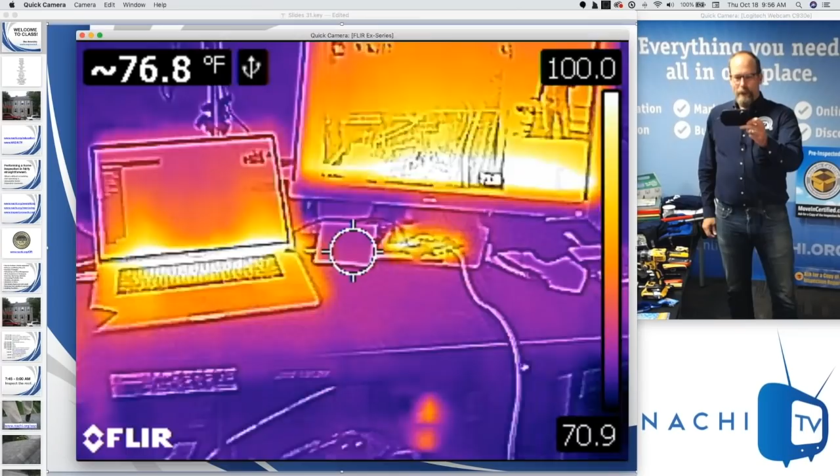This helps a home inspector perform a better inspection because it allows me to see things that I wouldn't normally be able to see without it. That's what an infrared camera is. It's essentially that.

It's very similar to my table of tools here. This guy, right? This is a high lumens flashlight. And this allows me to see things that I wouldn't normally be able to see without it.

The standards of practice for a home inspection doesn't use the word flashlight, doesn't use the word infrared camera, or moisture meter, or screwdriver. But we all use one, right? It would be kind of odd to do a home inspection without a flashlight. Why? Because a flashlight allows me to see things that I wouldn't normally be able to see without it.

So if there's something hidden in the dark corner, right, I'm doing a visual inspection according to the standards of practice, and I can kind of look at it. But the home inspector who carries a flashlight will actually do a better job because she will be able to see things that she normally wouldn't be able to see if she didn't have a flashlight.

Same thing with infrared. Don't freak out about infrared. Now you're trained on what to see when a flashlight is turned on. You know, because you've been living as a human being, what you're looking at, right? But when you use an infrared camera, it's really different, it's quite different, right? So you have to be trained on interpreting what you are seeing with the infrared. There's my camera, there's my flashlight that I just used, and it's hot.

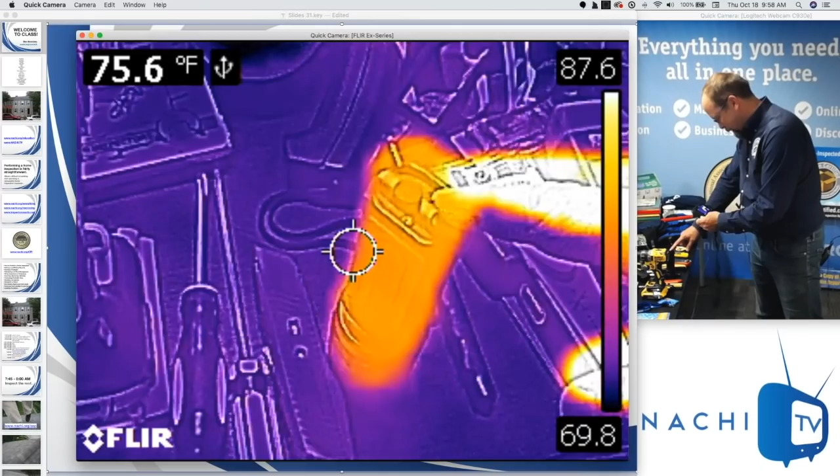So infrared is a really great way to provide value to your home inspection service and differentiate yourself from others. And the third benefit, and most important benefit, it allows a home inspector to perform a better inspection, right?

Let's see, let's start. It's just about time. What's the name of that camera? It's a FLIR, F-L-I-R C2. FLIR C2, it's my favorite. I have a FLIR C2, I have a couple actually, FLIR C2s. I have a FLIR C3. I have this camera, I have a FLIR, an old one, E40BX. I had a FLIR BCAM SD. That was an old one. So I like infrared cameras.

I still use them. Just yesterday I was in my driveway, driving home, pulling up, and my neighbor is standing in my driveway waiting for me. Why? Because she knows that I'm the local neighborhood home inspector who has an infrared camera and a moisture meter, and she has a water problem. Her roof is leaking, she wants me to come over today. And I didn't have my infrared or moisture meter at home yesterday. I said, will tomorrow be great?

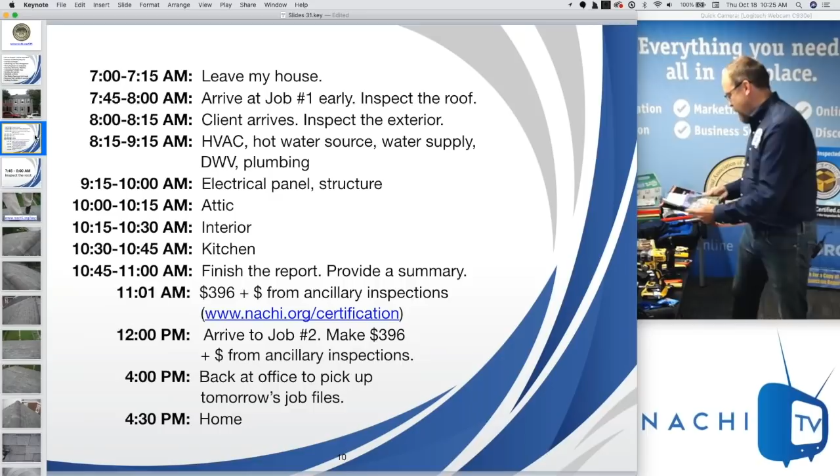You can get the regular cover or a customized cover, same cost. If the perceived value from my client is greater than the cost - I think the perceived value is like $19.95. You can probably get this on Amazon, something similar, full color inside. It provides information I don't need to give during the inspection and waste everyone's time about home maintenance.

That's valuable information, it has weight to it. It's valuable, it's a heck of a lot of value, and it's only $2.70 - costs me nothing. If I actually raise my inspection fee $5 and provide a $2.70 product or service, I just raise my inspection fee and my clients pay for their own home maintenance book and a cup of coffee for me every day.

I don't buy anything, not even my infrared camera - my FLIR C2 for $500. Go to Inspector Outlet - members get discounts or special pricing consideration. I would just raise my inspection fee a few dollars, and over the year this would be purchased.

By who? Not by me, I don't want that overhead. My clients - my clients buy the tools that I use, that in return provide great value. Does that make sense? I'm not going to think 'oh, $600' or 'oh, $2.70 for a customized home inspection book.' Nope, this is just an opportunity to provide value, and that overhead is going to be paid for by my client.

Oh, we're like three slides in and we haven't even gotten anywhere.

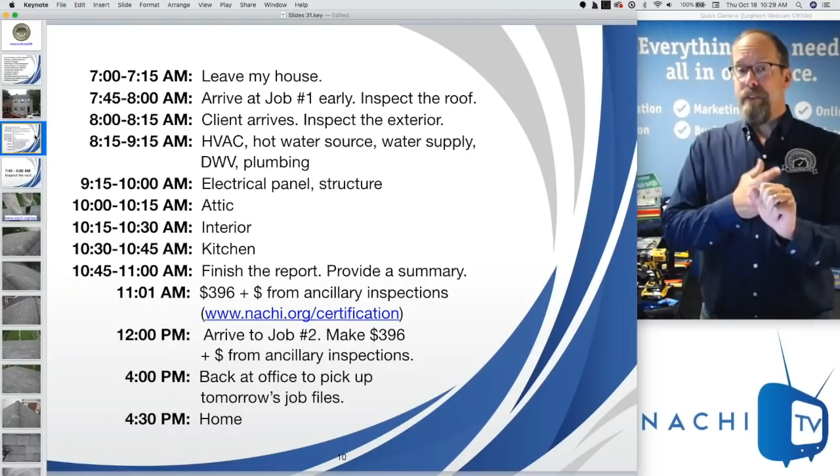I'll do that. In my business, when we did a home inspection, 75% of all home inspections were bundled with a radon test, 50% were bundled with a wood destroying organism inspection, and 10% were bundled with a water quality test, and then it went down from there. So there's potentially profit in that. There's another rule of thumb: if it doesn't add a significant amount of time, you can do that ancillary service and it will be literally just profit.

So here is where you go to get ancillary inspection certification: nachi.org/certification. InterNACHI provides more than 45 additional inspector certifications, not just home inspection, not just the CPI. Remember we talked about the CPI logo, but we have all these others - there's a drone certification, a commercial inspector certification, a deck inspector, a garage inspector certification, an indoor air quality inspector certification, a meth house hazard inspector certificate, and a lot of other additional certifications.

You put this, it's almost like a copy paste. You can try to copy it, paste it on one of your web pages that says something like 'my qualifications' or 'why hire me?' Because the inspector with the most badges wins in that kind of value area. The value of you being certified in everything is incredible. I'd pay for that. The more value you bring to your business, the higher fees you can demand.

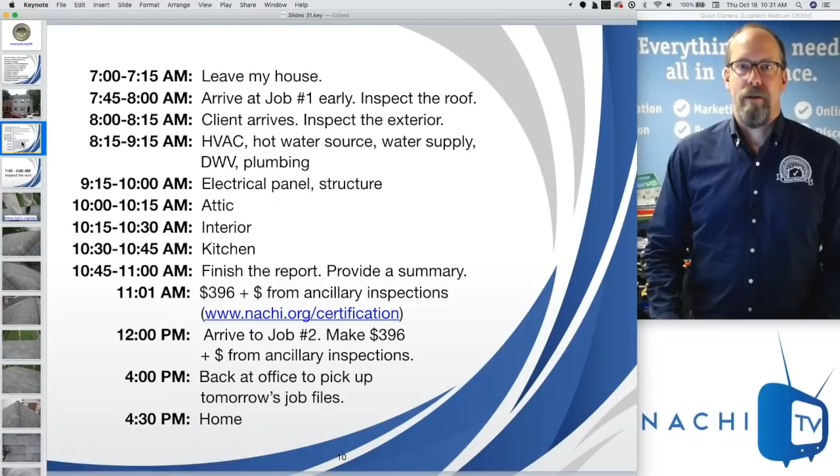7:45 to 8 o'clock, I'm inspecting the roof. And bam, that picture is in my inspection report. Why? Well, I walk on the roof. I'm telling you, don't - it's fatal if you fall. It's not required. According to the standards of practice, you're not required to walk upon any roof surface.

The standards of practice link is right there, you can click it, NACHI.org SOP. It says not required to walk upon any roof surface, not even a one-story flat roof. Not required to walk upon it, but I do. Why? Well, I felt that it was better for me to do it as an inspector. I got to see more. I got to see defects that I wouldn't normally be able to see if I was inspecting from the ground. So there's an advantage there.

I found I did a better inspection than my competition. And the other reason was this amazing photo was on my website, in my marketing, and in my best marketing piece that I could create, which is my inspection report. You can put that also on social media and blast this out. That says a lot - you actually walk upon roofs, and it looks really tall, and it was.

That's okay. I wanted to - if I'm going to do something in my normal routine process of performing an inspection, and it's better than my competition, I have a duty to tell everybody about it. The result is I'm going to beat my competition because I am communicating value. It's on my social network, my channels, my neighbors know it.

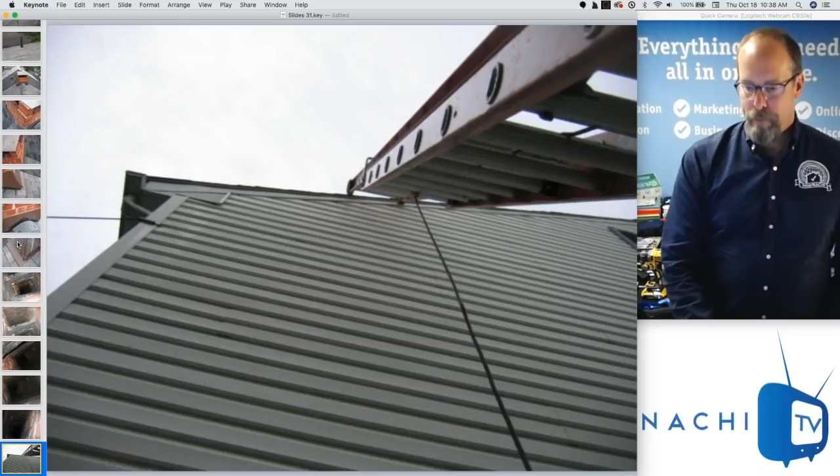Really cool shots, that's just my camera with a zoom. And that's me getting up on the roof. And as I come down, I look at the gutters, see if there's any venting, ventilation, any fascia, eaves issues.

And I'm down on this, I believe it's the back side of the roof. Yeah, and there's a secondary roof. So I'm on this porch roof on the back - well, it used to be a porch, and then he enclosed it. Some debris in the gutters. Wherever there's two different materials touching each other, intersecting each other, I want to see flashing. If there's an open gap, I want to see that open gap flashed or sealed. So there's flashing there, that's good.

Flashing and sealant around the windows. They've been capped, old windows. The vinyl siding is probably installed on top of brick or something. There's a shot of the backyard, and not required to, but I'll take a look at the driveway in the back there and the parking area for sure, but that little ancillary shed, I'll take a look at that too.

And I'm thinking also of how water is collected by the roof, controlled, captured by the gutters, controlled by the downspouts, and discharged away. You are not required to inspect or be responsible for anything that goes underground. So I don't know exactly what happens when it's raining. It's not raining today - it could just overflow. It's a hard surface, doesn't look like dirt is eroding. There's no indications that there are any problems with the underground drainage pipe, but there might be. I'm not responsible for it.

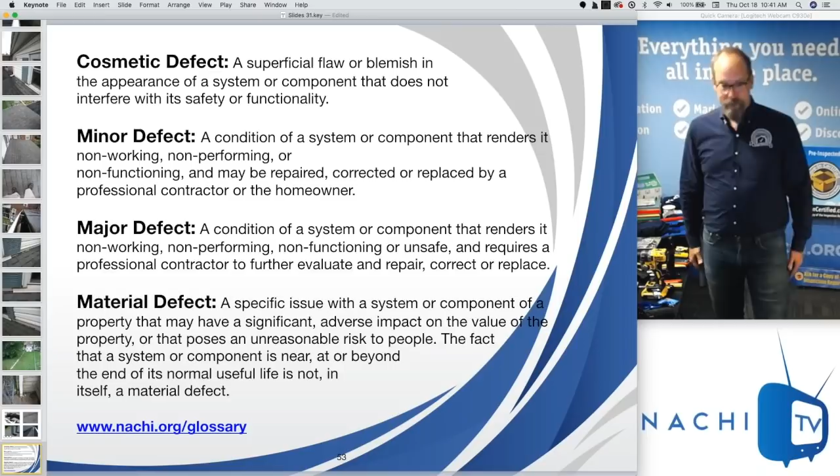How do you inspect roofs in bad weather? I don't. I mean, I try to be safe. I've got a family, right? So I want to come home. That's the most important thing—always being safe.

If it's slightly wet, for some reason, asphalt shingles to me were just a little bit stickier, I don't know why. If it was snow and icy, and it was low to the ground and safe, I sometimes went up there with a broom. All I wanted to do was get some kind of eyes on some part of the roof. So I hardly ever excluded a roof from my inspection. I was always able to get out there somehow.

Nowadays, like two years ago, I wasn't all that crazy about drones, but now I've got a drone myself, and we fly drones. We have a drone course. It's fairly available for a home inspector to be a drone pilot through the FAA—you've got to take the pilot exam. We have a course that helps you take that exam, and you can do drone video or drone imagery with 4K resolution, so you can blow it up.

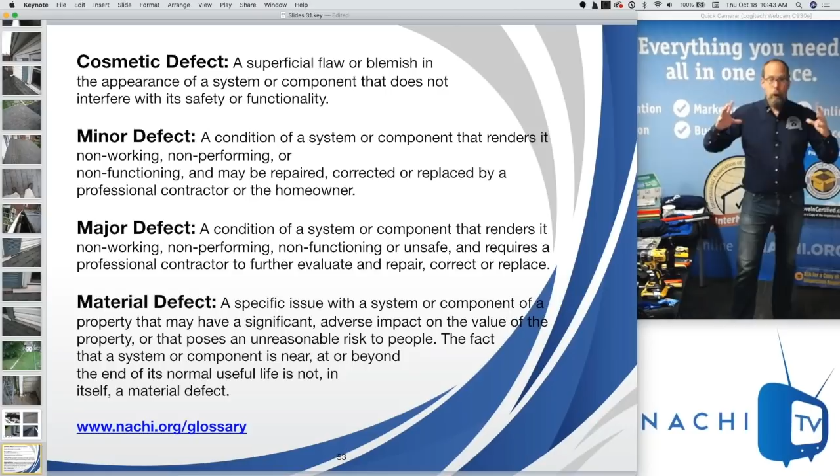So if you have a drone and I don't, but I have ladders, that would be a really cool way to compete with each other. How am I going to compete with Bob, who has a drone, while I use ladders? Bob's website probably has a home page, a hero image with some kind of aerial view, and he's standing there with his controller, waving. That'd be an awesome shot. I'm probably going to put myself on a ladder, getting up on the roof, something like that. We'll compete, and it'll depend upon what people value, right? So you have to think about that kind of stuff too.

You don't have to get up on every roof, especially in bad weather.

What are the most important tools, meters, and software a new inspector should get? That's easy. You need a flashlight, a high lumens flashlight, right? You need these things.

Flathead and a Phillips. I like, and I don't have it with me, I don't know where, it's a combination, it's like a 6-in-1. So you hold one, pull out the flathead and spin it, and it becomes a Phillips. Or you pull it out like this and take out a screw, a hex screw or something. There's like 6-in-1 sets in it.

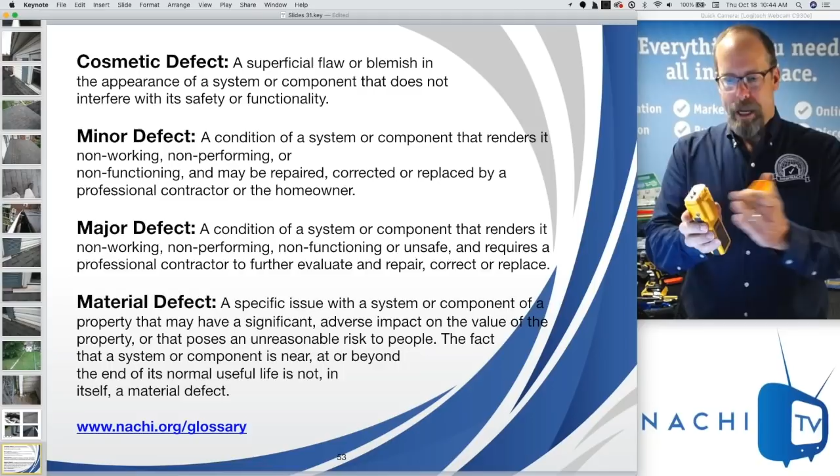I would get a moisture meter, even if you don't have an infrared, but that's next—a moisture meter with pins and a non-invasive surface. This is a Protimeter, this is an Extech, kind of like that. The microwave detector is kind of like the shock and awe—you stick that in the microwave with a cup of water, and it turns red if there are microwaves.

I use this when I want to—it's a laser thermometer, so I ping the registers, electric baseboards, boiler baseboards, water baseboards, radiators. And then these are my favorite too—this is an extendable hoe.

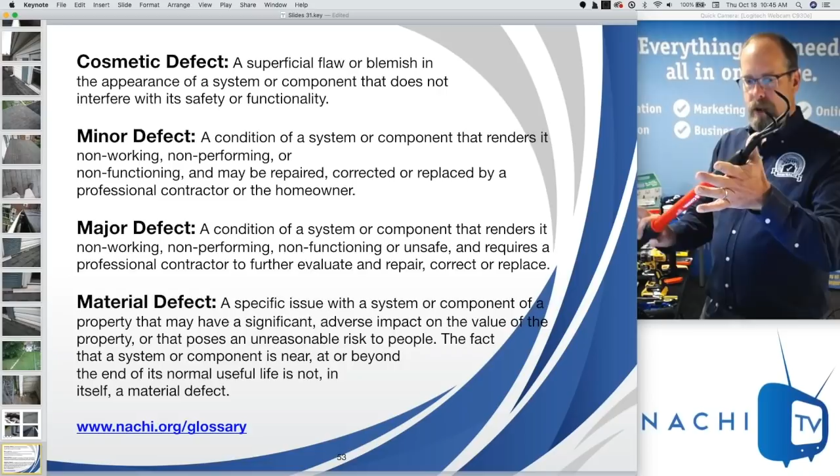So the whole total price is just a few hundred dollars. Your flashlight, a good one, is $200, but it's LED lumens. Then the other tools—well, you need a razor, that's nothing, a mirror. Infrared is probably the most expensive so far, $450 to $500. This extendable hoe is probably $50, and it extends.

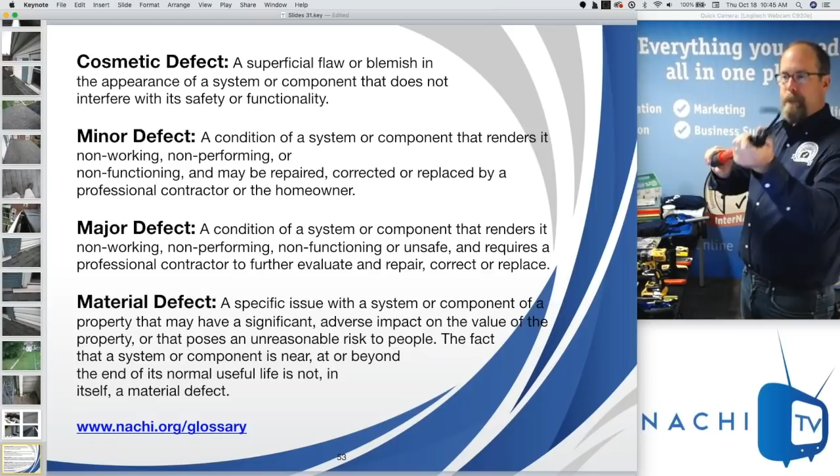It has 3 tines on it, like fingers. I heat one up and straighten it so I can poke, and the others are for hooking and grabbing insulation and putting it back, and no one knows. This is a hydro shark, very difficult to find, but they're still around, so you got to Google it.

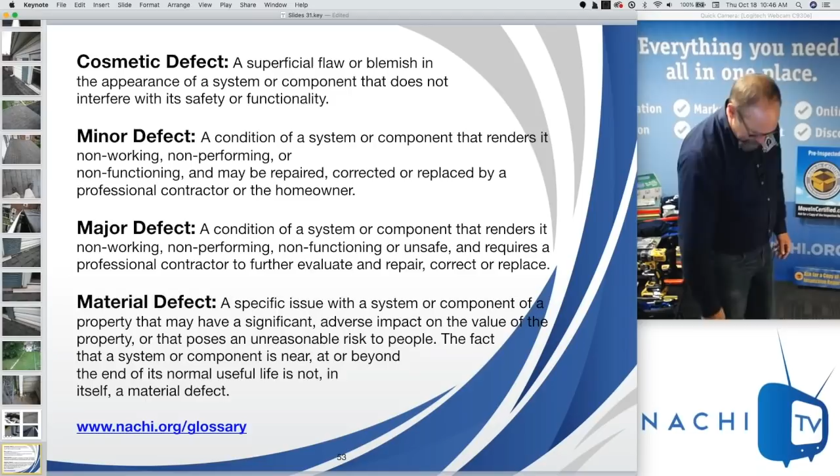But it's a moisture meter. There's pins here, and it gives me a symbol and an audio signal. What I do is reach a ceiling, and I can also go around a basement and go through the carpeting and padding, right? So that's an easy thing. If you're doing well flows or water flows, you need a water meter.

Those are the tools. One of the most important tools, if you do a lot of vacant homes in the morning, you need one of these. I wore this instead of putting Peach Inspections, that was my company name, Peach Inspections, on the back. I wore this so everybody knew I'm not trying to rob the place or break in. I'm the inspector.

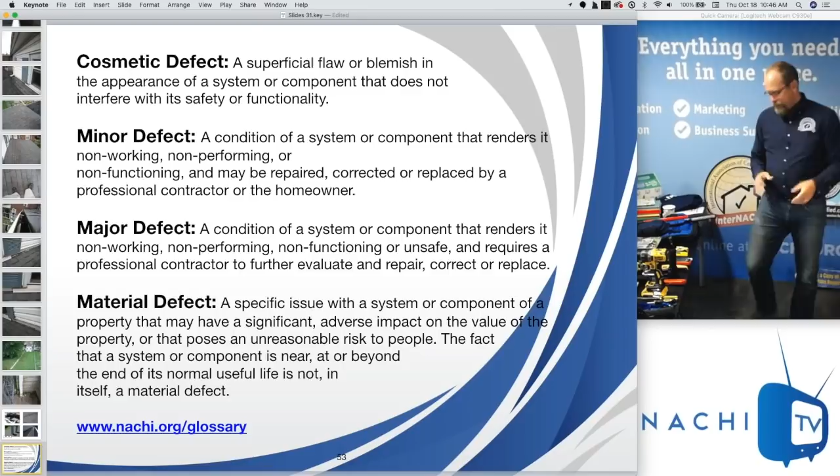Yeah, so those are the tools. It's a very low entry point, you don't need to invest a lot of money to get in. One of the other expensive things would be software. It's essential, you need software. I have software on my phone.

Let's see. Come on, there it is. Oop, oh hold on, where? So software... sorry, that's my wife.

That's Inspector Coach, I have Home Inspector Pro. Home Gauge works on PCs, I believe. And I have Spectora on my phone. I also have Pitch Factor, which is an app.

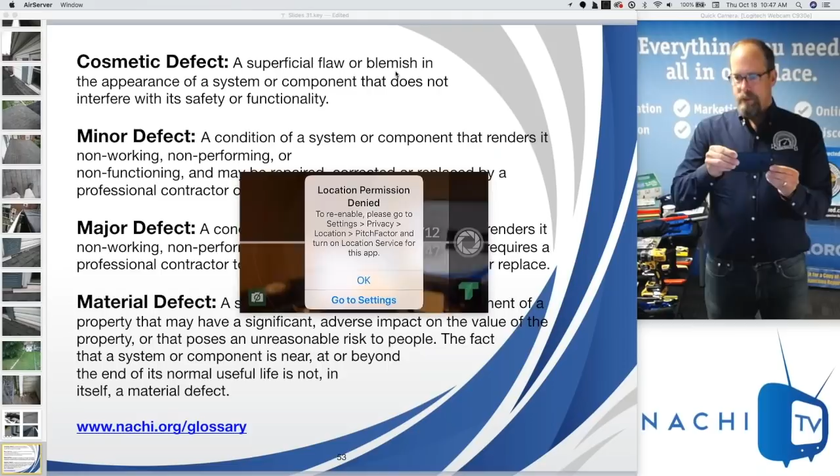PitchFactor lets me measure the slope of the roof. I don't know why they say pitch, home inspectors use slope, not pitch. Pitch is that black stuff, tar. This is a cool app for measuring things.

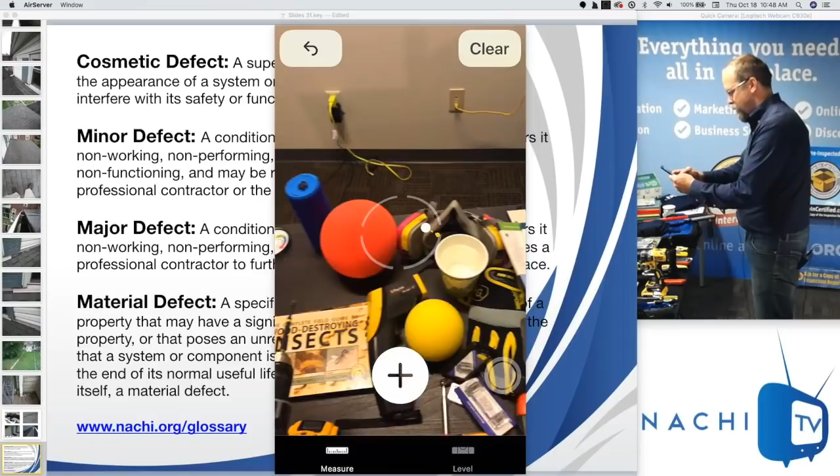Let's see if I can actually get it to work. If I want to measure something, I'll drag it and measure over here, and over here, this way, measure this way, so that, right? And then I measure like that. You see this? Hope you can.

Oh, oops, I'm shaking too much. Well, anyways, it can measure for you. If you want to measure that, so that's 15 inches. Oh shoot, let's try it again. There, it's there, so I'm going to measure this. Measuring this distance, there. Maybe I'm not doing it quite right, sorry about that.

It's a new app that I'm learning. It actually takes measurements in 3D space, and then you can snap a picture of it, if it was working. Don't know, it was working for me just a little while ago.

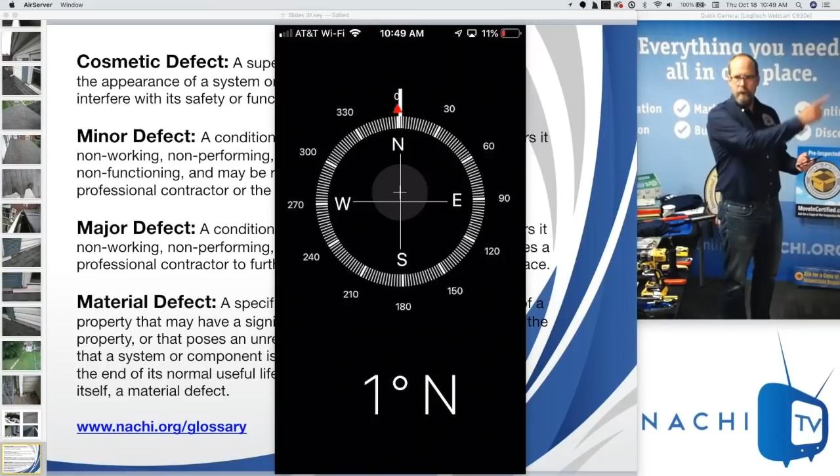Technology again, right? How about the compass? Obviously, so where's north? North is that way. East is towards you. And then there's software.

I'm learning Spectora, it has good software. In the residential report, here's the roof covering materials. I inspected it from the ladder, let's take a picture of the roof. Let's say this is a picture of the roof, very nice, use that photo. And then it's asphalt shingles, it's 5 to 10 years old.

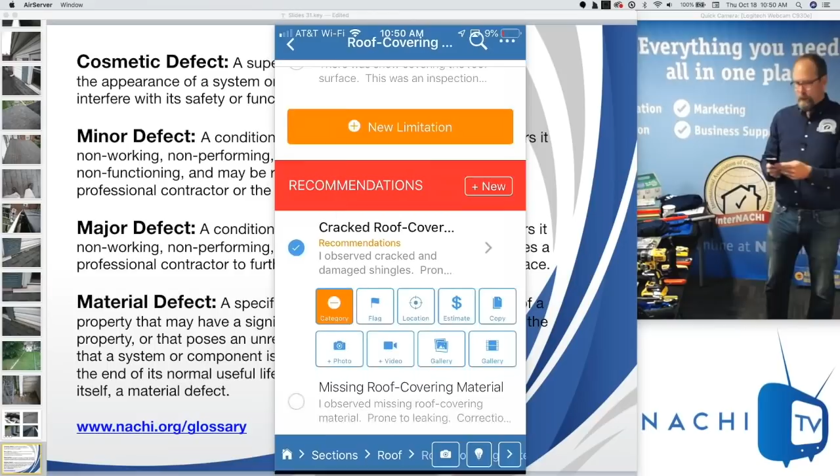There's cracked roof covering material. Oh no, there's cracked, that's a cracked roof covering material. I take a picture of that, and that goes in the report, right? And I can add arrows and stuff if I wanted to. It's fun, and that goes in the report.

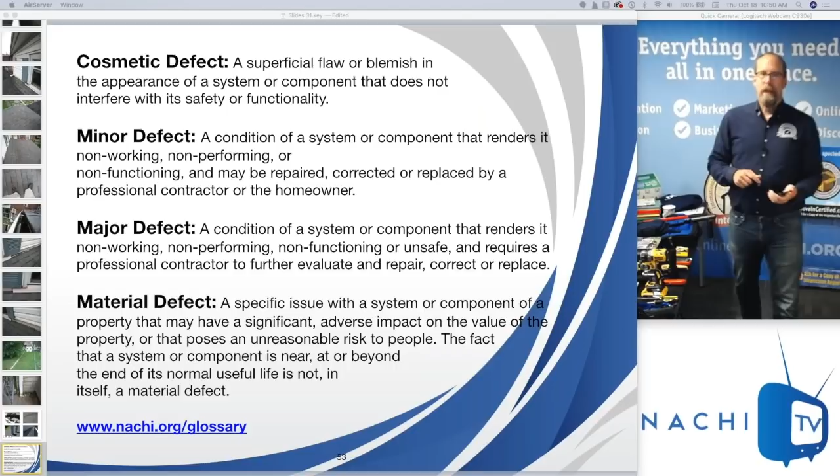So while I'm inspecting, I'm taking pictures. You can also do video. Hey everybody, there's my webinar room, tabletop. You can put that video in the report and throw it to the cloud. Now your inspection reports are immediately available with 100 photos and video, and you're inspecting and writing at the same time. That's really efficient with your time.

In your report, I would identify defects. I recommend using some type of definition standard that identifies the degree of the issue. If it's a minor problem, say minor. If it's a major problem, say major. Or if it's a material defect, defined as a defect that you saw and deemed material, something posing an unreasonable risk to someone's life, that's a material defect. These definitions of different types of defects are in our glossary at nachi.org/glossary.

A cosmetic defect is like a superficial flaw, it's a stain on the carpet.

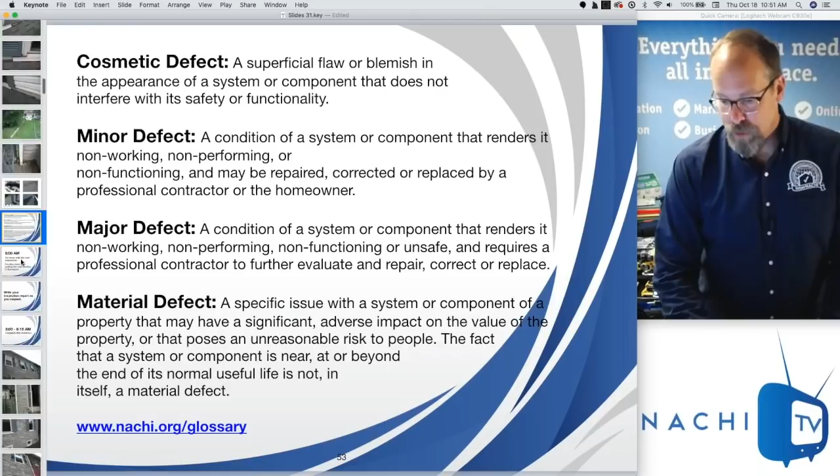A minor defect can be repaired by the homeowner. A major defect needs a contractor. And a material defect, it's going to hurt someone. I use those definitions in my report, so when I take a picture of a defect, I tag it as cosmetic, minor, major, or material.

And it's already defined. 8 o'clock, I'm done with the roof inspection and I'm walking down, looking at how rainwater is collected and controlled and diverted away from the house. I'm also done writing up the roof system, so the inspection report is partially, completely done. I'm done inspecting it, I'm done writing it.

You should write your report as you inspect. Why? Because to make money you have to think about math. The top part is the numerator of the fraction, right? Two numbers divided by. Top number is numerator, that's the amount of money you're charging. Divided by what? Your time. If your time is taking all day to make money, you're going to go out of business. You need to reduce that time, reduce that denominator.

And you only can make money that way, like $500 in 5 hours is $100 an hour, right? But if you only spend 3 hours, then you're going to make more money per hour. And that's where you want to be. You want to be efficient with your time.

One great way of being efficient with your time in your home inspection business is to write your report as you inspect, so you're not spending time at night after dinner writing your reports, which is open to error because you can't remember what you saw 8 hours ago.

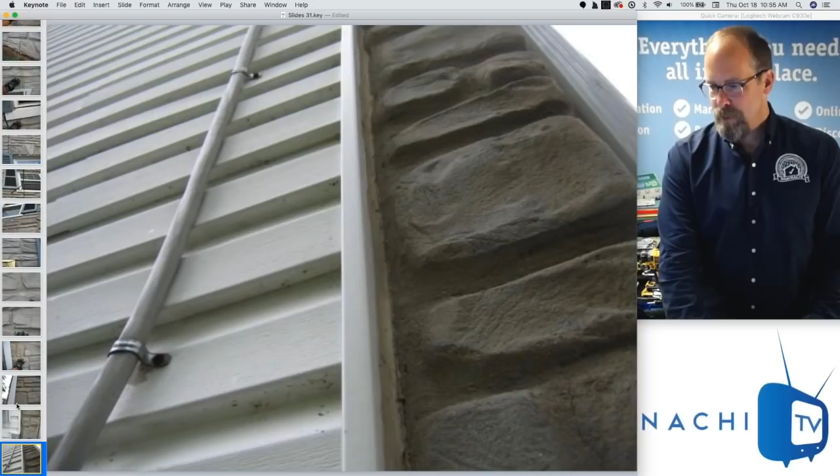Cracks here and there, not bad, nothing's loose. Two different materials coming in contact with each other. There's the electrical line coming down to the meter on the side of the house. The downspout, I want it diverting water away from the house, not at the corner of the house, which I think used to be a porch in the back that they enclosed. So we'll take a look at that corner, see if there's carpenter ants or wood rot or moisture problems, especially when I see algae growing on the siding.

So I think about water as I'm inspecting the exterior - how water hits the roof, is controlled, collected, and diverted away from the foundation. It should slope. The first 10 feet around the foundation should slope about 6 inches down.

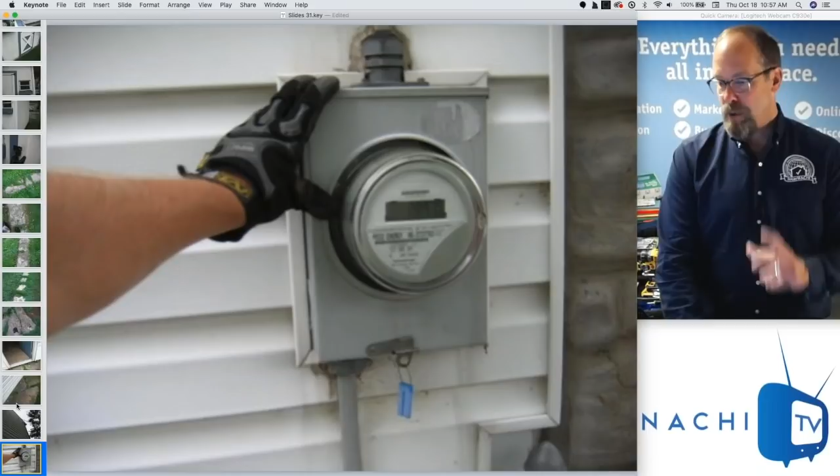Electrical line, overhead electrical line, drip loops securely attached to the house. Electric meters securely attached to the house. The line going into the house, the service conductors going into the electrical panel - I'm going to inspect that and follow that in.

And here's where we talk about code. So before we get to code, stairs, and handrails, let's see - oh, there's a ton of questions. I don't know if I can get to them.

I would like advice on advertising because I'm not getting any calls.

So Angela, I get that question a lot. There's a few things you need to focus on. I would go to inspectorcoach.com and download the 8 steps - that'll help you. Make sure you have a web presence.

Because why? I don't even go to a restaurant unless I visit the website and look at the food. I'd assume people don't go to a movie and buy a $15 ticket before they watch the previews. If they like the previews, they go to the movie. Same kind of mentality - we like to test drive before we purchase, test drive a car before you buy it. Same thing with a home inspection company.

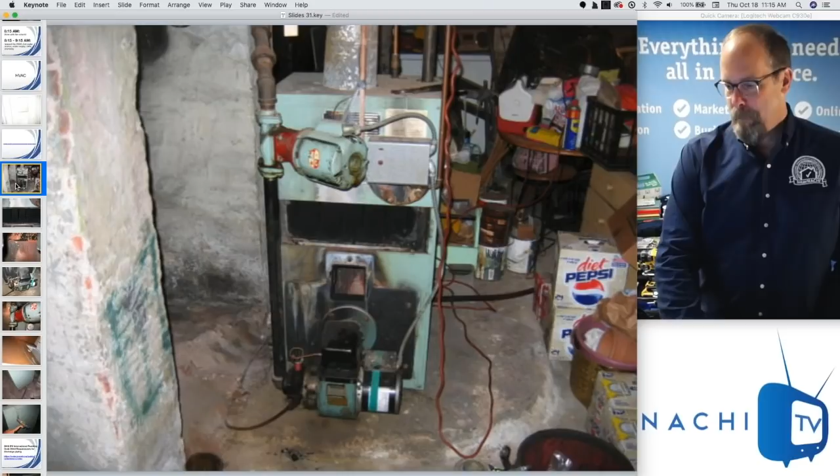Here's a heating system. If you're unfamiliar with this, if you're in Florida, you have no idea what crazy stuff we do in cold climates. This is Northeast, and what we do is we suck this black stuff called oil out of the ground and we burn it so that we can heat our home, right? Crazy. So this is a boiler, it's filled with water. There's a burner that's sucking oil, turning it into a mist and igniting it. Flames shoot into a chamber, heats up the water in the boiler, and then we turn on a pump and circulate that hot water throughout the house. Crazy. That's why it looks like a mess.

So much fun to inspect. In the front, there's this little thing you can pull off. You can kind of see that chamber of water, and I did that, and it is filled with soot. Like, what is this? Why is there so much soot on the outside? I have no idea. Am I supposed to? Am I supposed to know what is going on here? Why is there soot all over this thing? Oh my gosh, no, I'm a home inspector.

This is like walking along a path and tripping over a stone, a trip hazard. This is unusual because I've taken all the courses that I need to be knowledgeable about how to perform a home inspection. And when I come across something like this, soot, it's almost like tripping over something, it's so obvious and conspicuous. So I just put it in the report as a major problem. We need somebody in here to look at that further, right, and to fix it if it's necessary to fix it. That's it, I'm done. Click.

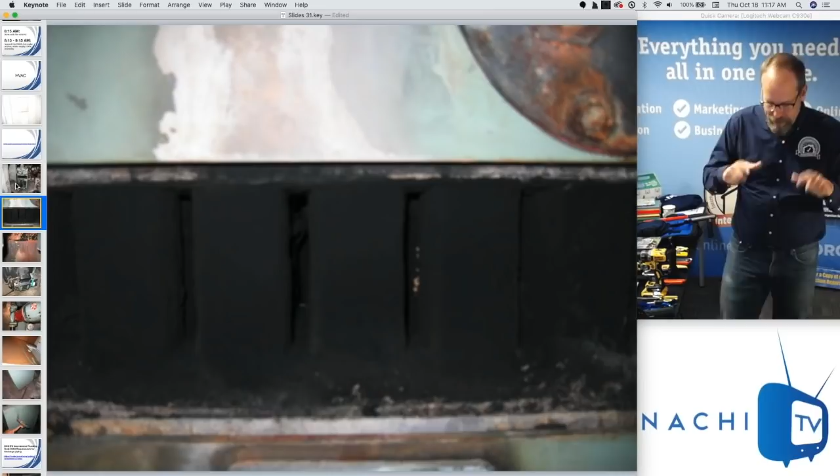This whole inspection of the boiler system takes maybe 5 minutes, tops. Click, I'm done. Whoa, there's the chamber, there's the burner. Half of the job of a home inspector is just identifying the components of a system: circulating pump, emergency shut-off switch, drain for the boiler system, rust on the jacket, discharge for the TPR, temperature pressure relief valve. When you heat up water, it needs to expand. There's a lot of pressure and temperature things going on. If there's a problem and it exceeds a certain kind of limit, we have to release it, release all that pressure and temperature and discharge that hot water, which could be scalding.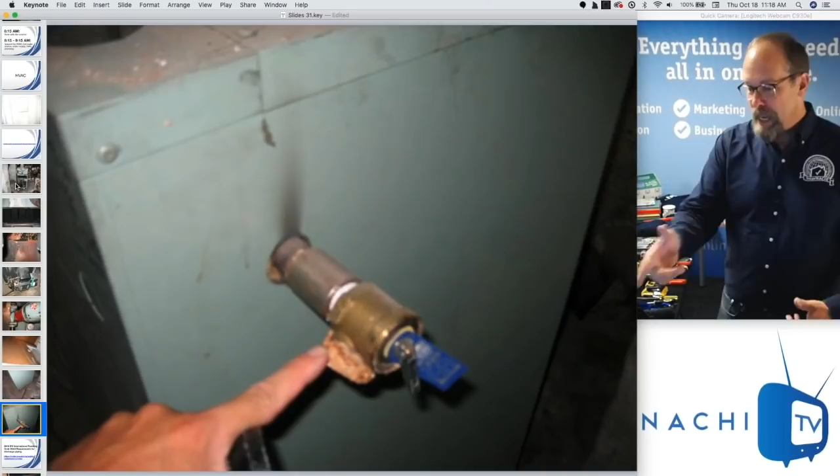There's 14 things that code says about how to properly install, or what a properly installed TPR valve discharge pipe should look like. And this is violating several. That code is in the 2018 International Plumbing Code, section 504.6, requirements for discharge piping. That information is actually in an InterNACHI course about relief valves, and you can take a look.

There's a few things every home inspector should know. One is the TPR valve should discharge with an approved material pipe down to the floor so that no one gets scalded with hot water if there's a temperature pressure relief discharge.

The flames inside the chamber have exhaust gases that are hot, and they need to enter a chimney stack and take that upstairs, out into the atmosphere through a chimney. Remember, the chimney is unlined.

Damper control, oil line, other components. The hot water actually comes from the boiler itself. Cold water comes in through a coil submerged into the container of boiling hot water. So it coils in, and as it coils out, it's hot, scalding hot. So it has to have a temperature control valve on it, because the hot water to all the fixtures is going to be 180 degrees, 200 degrees.

That's burning. That could burn a little kid. It can burn anybody within a couple seconds. So we need to temper that hot water coming from the boiler. It's missing on this old boiler.

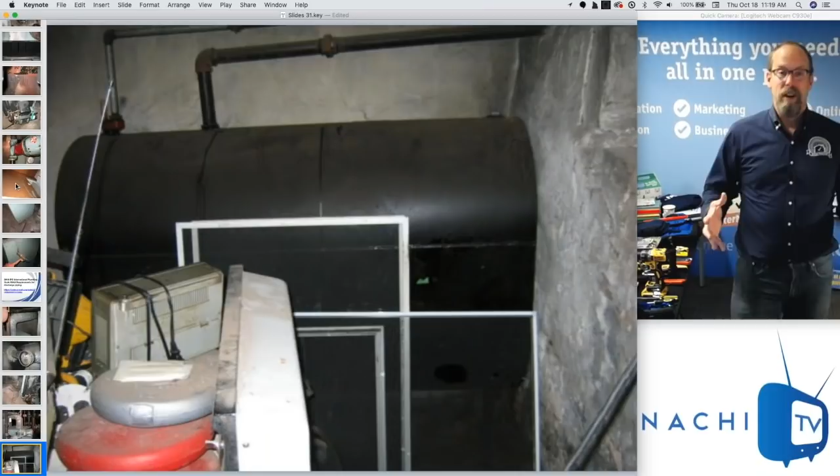Oil storage tank. They store oil in tanks inside basements in cold climates. Crazy. There's the oil fill pipe, oil vent pipe, the gauge, oil filter. This pipe goes to the boiler, to the burner of the boiler.

I take a look at the underside belly of the tank and the legs to make sure there isn't any major rust. I get my screwdriver, or you can grab a hammer. I bring a hammer, but I don't actually show it, because nobody wants a home inspector swinging a hammer. I try to tap things, but you can also tap and probe.

Sometimes, when you're probing a load-bearing wooden component, your screwdriver goes through it, right? That's wood rot. I leave my screwdriver in and take a picture. Remember, if you do damage within the scope of a home inspection, there shouldn't be any damage that you find. So you should have nice pick tests.

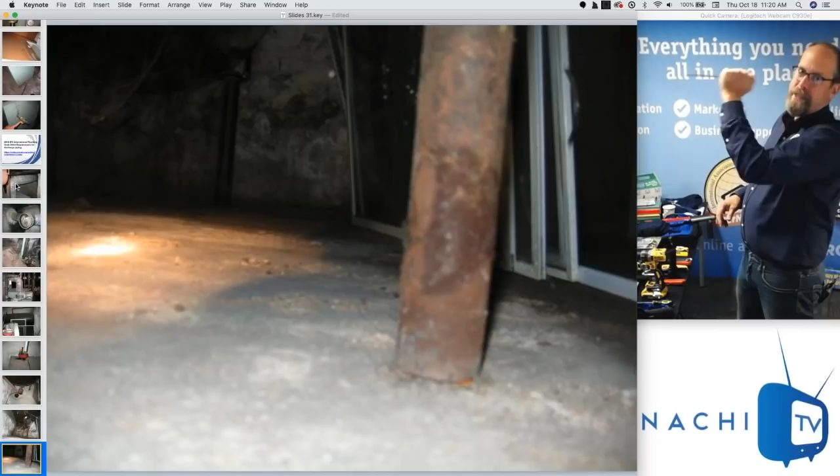They're called pick tests, sound tests. But if it goes through, I crank it open and take a picture of the wood rot, and I put it back. So if my screwdriver goes through this pipe here, I'm taking a picture of it. It shouldn't go through, it's a steel pipe. And if it does go through, that's 500 gallons, 750 gallons, that could dump in someone's basement. We don't want that.

Expansion tank, hot water source comes from the boiler. And there's... let's see if I can grab it. Can I grab that? Yeah. So there's the control valve for the hot water, and that round circular thing is the domestic coil.

Water supply. Water comes in from the street. There's a main shutoff valve, a ball valve, a water meter, jumper cable, another ball valve, turn off, check valve, done.

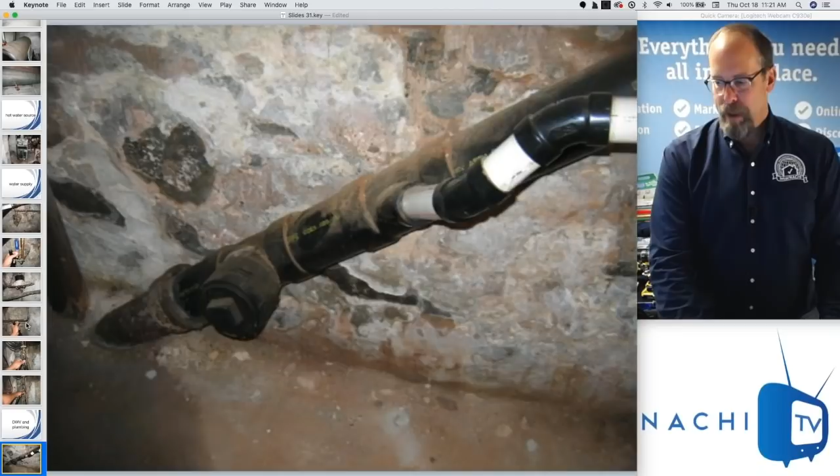Drain waste vent plumbing, some PVC, ABS. Don't like the combination very much. And then there's a sewer pipe here, cast iron sewer pipe, and it has a hole on top of it. I lift my camera up and take a shot, take a picture. There's a hole in the sewer pipe. That's a major problem. It's in the report.

Some other fittings here and there and some cleanouts. I'm just looking for a nice slope on the drain pipes, any active plumbing leaks that I can see, proper support of the pipes. It's very difficult, these are crawl spaces.

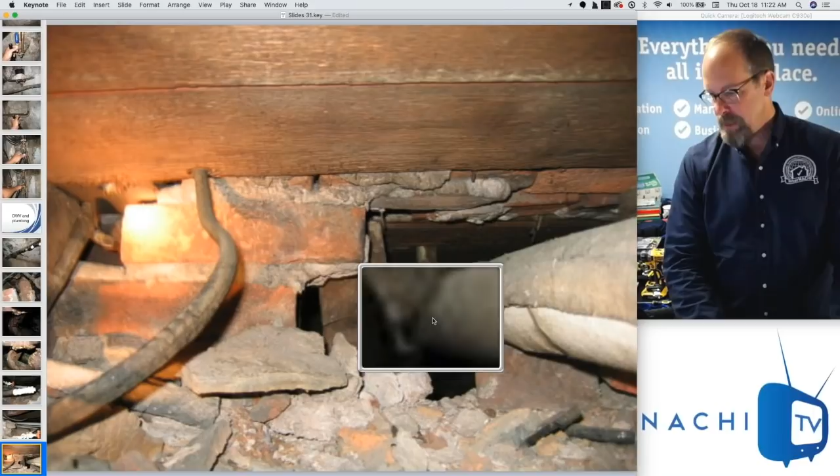We've got asbestos material. I will comment on any indications of apparent asbestos material for my clients. I'm an EPA certified lead hazard risk assessor. I didn't do the asbestos assessment, I don't need to. But that is asbestos, and so is that. I want my clients to know that.

Asbestos wrapped around the heating pipe there, going through the crawl space. I can't access it. Down in the basement there was a laundry tub. They removed it, but the fixture is still there.

Electrical only takes fifteen, twenty minutes for the panel. The structure takes a little bit longer because you're looking for structural problems and water. Water brings life, but it can destroy a home.

So for the electrical panel, take a picture of the outside. All the breakers should be specifically labeled. There should be plenty of room, and there should be a main disconnect somewhere. There shouldn't be any openings where I can stick my finger and get fatally shocked. A hundred amps, one finger is one hundred, two is two hundred amps.

Structure is very difficult, can't get everywhere, but where I can get, it's old original masonry, stone, beautiful. The stone structure looks great, but when you have stones like this, you have water. Stones are like sponges, they absorb water through wicking and absorption. And the dirt on the crawl space floor isn't a very good idea either, it's allowing moisture to come into the basement and the crawl space.

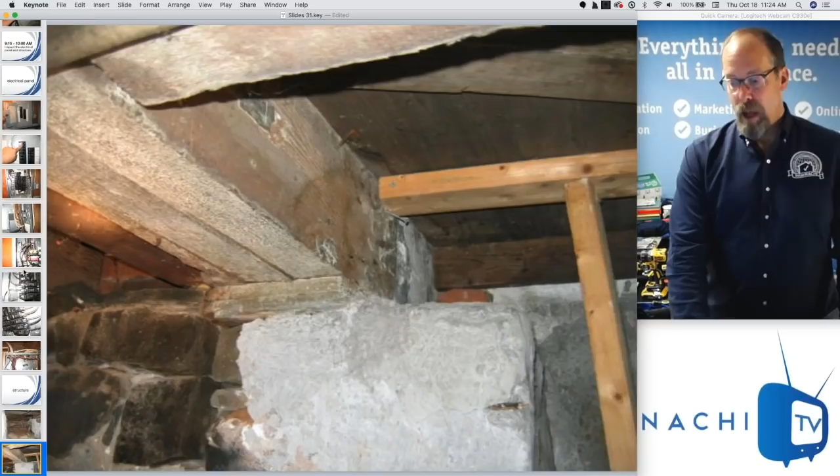There's a lot of structural things, like extra support. Those 2x4s were kind of nailed up into the floor to support the floor in certain areas. This was in the back room area, maybe that enclosed porch area. There was a porch and now it's being used as a finished room.

It's a bit of a concern, I don't really like the way this was installed. It could be installed better. If you know how, in a pre-drywall inspection you get to see the studs, you know that the top plates, the studs, and the bottom plate kind of look different than what this looks like. Load-bearing components are installed a little bit better. There's not even anything plumb or fastened properly.

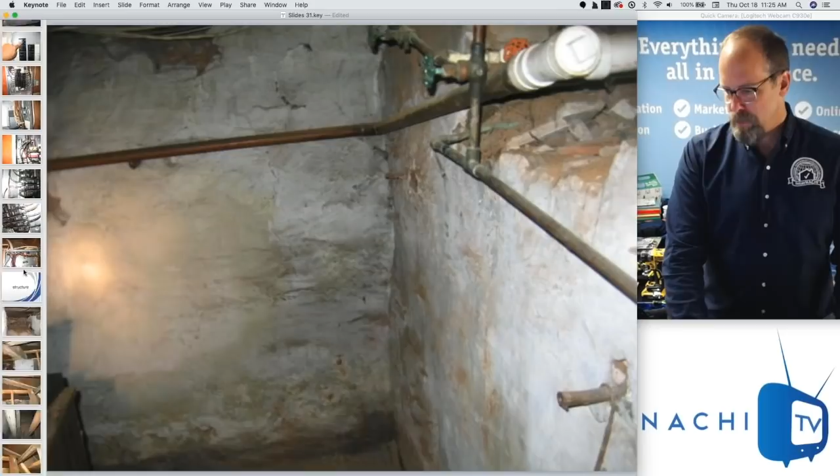So taking a look at stuff, there's a lot of pieces and a lot of nails, and it's not looking all that great.

Drain pipes, different materials. The basement is difficult to see everything, can't really look around. There's moisture on the floor.

But I want to make sure that if I'm ever sued in small claims -- have been a few times, no big deal -- there's pictures that you take just to show that there were inspection restrictions during your time there. It was limited and restricted. There's dirt and moisture in the corners, and it's okay. Now if my client wants me to do a lead test, I can do that.

Certified lead hazard risk assessor, it's a great service, five hundred to six hundred dollars per service. Basically I go around and do baby wipes on surfaces, floors, and things like that -- steps, landings, windowsills, stuff like that. Because we don't want small children to walk around, crawl around, and get lead paint content dust in their mouths. It kind of stays in a child that's young. Adults, we kind of excrete it out.

But the point is that no matter what home I'm in, I'm ready to offer the right service at the right time. So if I'm down in the basement...

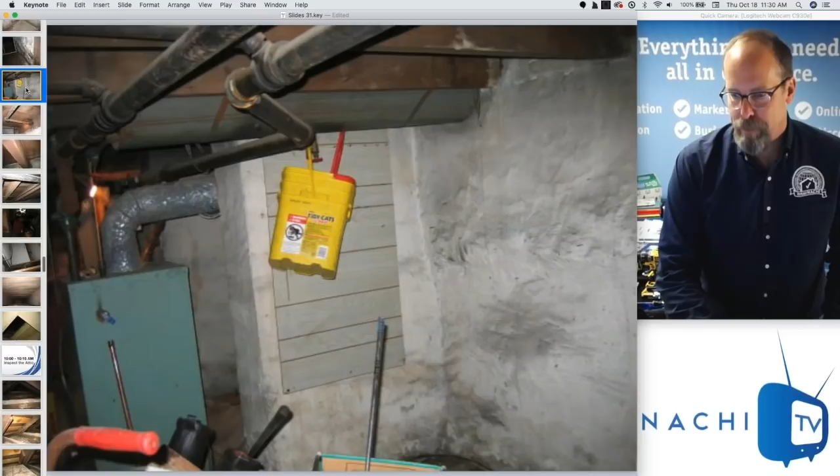Let's finish with the basement, and then I'll take a look at questions. Oh, measuring tape is one of those tools you asked about. So I take a measuring tape and I measure sometimes the depth or height of the floor joist, sometimes the length. If I'm doing a new home and I'm with the building supervisor, I'm going to inspect the length of the dryer exhaust - I always get them on that, it's way too long, too many bends. I'm also measuring things like access to the unfinished parts of the attic space.

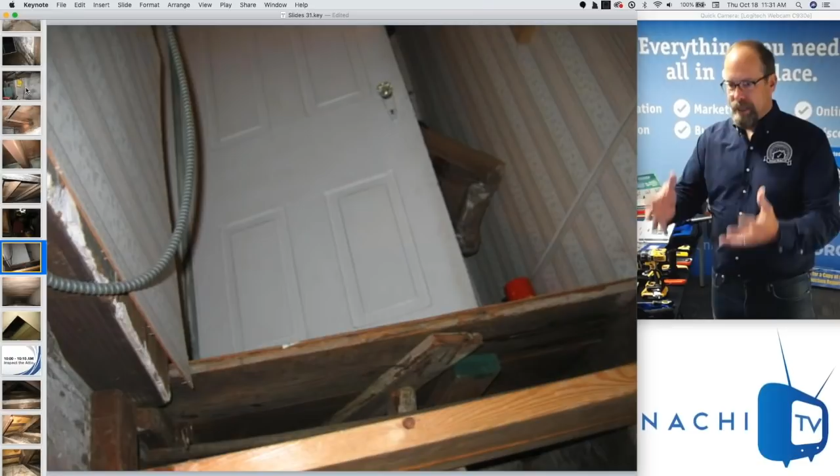There's the floor, and it's the landing at the top of the steps. So that's in a compromised kind of structural situation. We need somebody to come in here and fix that.

I'm going to inspect the attic now. And there's the unfinished attic.

But wait, let's see what kind of questions we have. Did you inspect the roofs in bad weather? Remember that? Okay, most important tools, advice on advertising, I'm not getting any calls - we answered that. What are your thoughts on drones for roof inspections? Good, we talked about that - drones provide value.

How can I assure potential clients and real estate agents that I'm worth the inspection fee? And is there a form or hotline I can contact if I run into something on my first few inspections that I don't understand how to inspect? Yes and yes. About your inspection fee, you have to be able to calculate a profitable inspection fee - that's chapter 11, I believe, in the home inspection business course. I showed you previously how to get to the home inspection business course. Just go to our education page, type in business in the search field.

There are other things you can do. There are tips on how to market to real estate agents, since you mentioned potential clients and real estate agents, and how to show them you're worth the inspection fee. So there's a general rule of thumb: overwhelm with value, value, value, value.

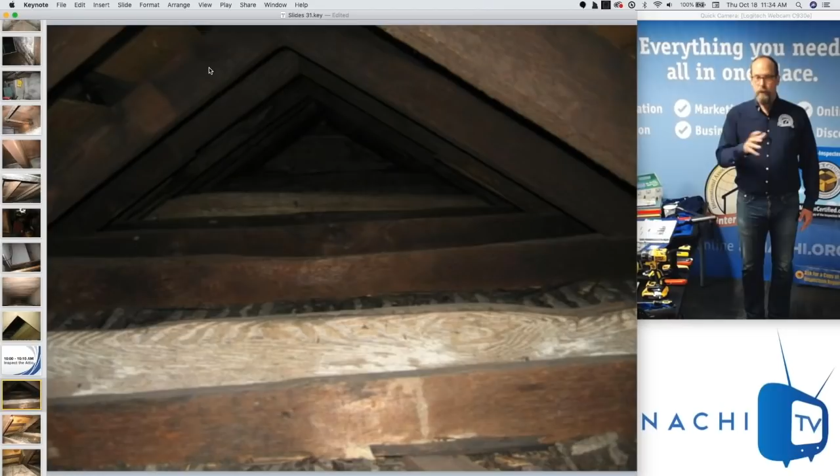How many immediately make the home inspection report and summary, with all the pictures and videos, immediately available after the inspection by downloading it from the cloud? Oh, that's software - high-tech software.

Now there's only like 4 of us - how many include a free infrared scan with every inspection? Now we're down to 3, right? And when I said free infrared scan, I actually meant free infrared scan - I didn't charge for using my infrared camera. It helped me do a better job. All I did was, because I was adding value, I increased my inspection fee to pay for the infrared camera at first, and then it's extra profit, right?

How many walk on the roof? Is that an unfair question? Oh, too bad, how many walk on the roof? Because that's my brand. Because the question could be, how many use a drone? Oh, I wouldn't walk forwards - darn it, all the drone people went up in front of me.

Now I'm behind. How many people offer a newsletter, the InterNACHI free newsletter, to keep in contact with your past clients? Oh, I forgot about that - I didn't do that, I was watching TV.

How many offer a home maintenance book bound in a beautiful 3-ring binder for every one of your home inspection clients? Oh, I was playing video games, it was fantasy football. So now I'm way behind, and my competition is way in front of me. If they keep going with all these value questions, they distinguish themselves from all the rest of us losers back here, and they're way out in the field all alone.

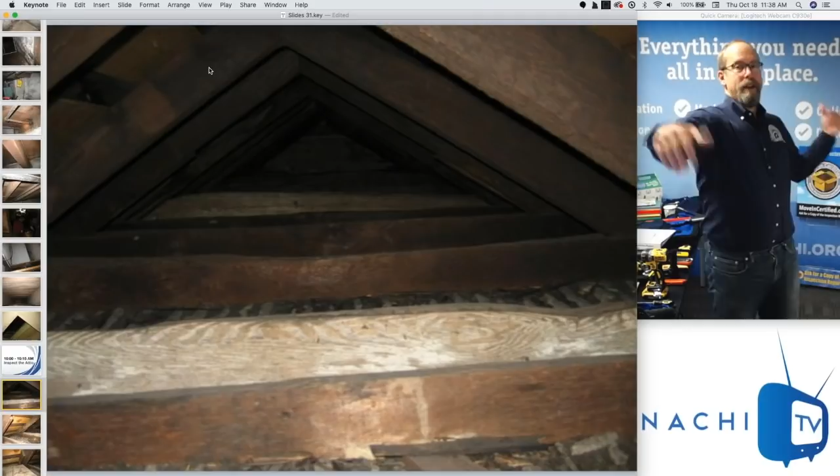And I don't even know what was the question? Oh, so how do you ensure - if you provide value, incredible value, that's all it is. So there's no secrets in this, right? So how do you get from here to where Sally is, way out in the field all alone, way ahead, charging $500 an inspection, making a lot of money, going on vacation, right?

You need mentoring or coaching or help from other inspectors. So we have an online forum, nachi.org/forum. You can go online and ask questions.

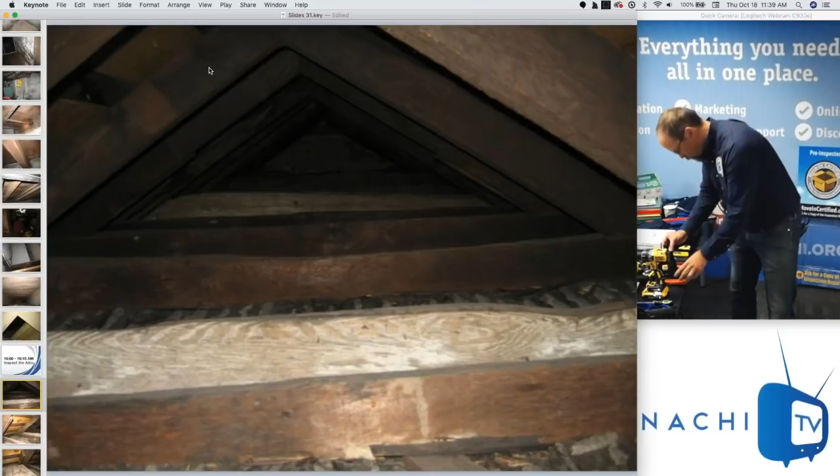I like inspectorcoach.com. On the online forum there's an emergency button, a big fat red button. You click it and you can get to speak to other inspectors while you're inspecting. So if you find something you don't know, what is this, you can excuse yourself, go online, hit the red button, and talk to other inspectors about what it is, and post it. Or Facebook is a good one too.

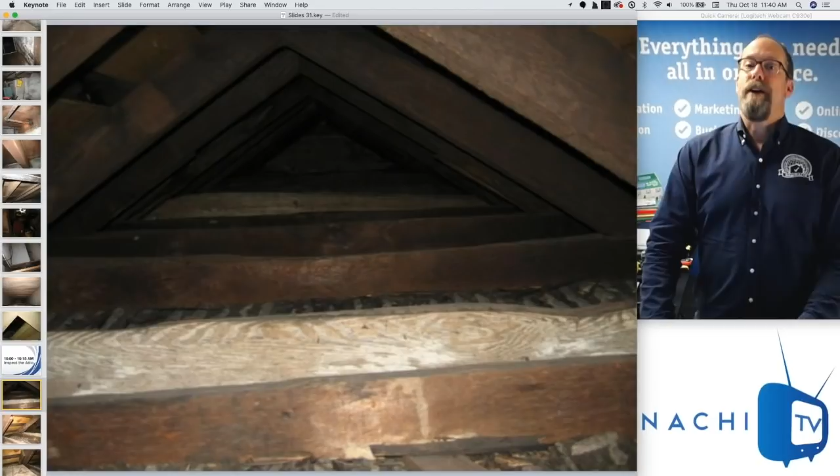How do I price a multi-unit, 12 lodgings? Well, that's way beyond the standard home inspection. Home inspection is 4 units or less in the same building, so you're into commercial now. InterNACHI has a commercial standards of practice. If you want to do a commercial inspection, you can get trained and certified as a commercial property inspector through InterNACHI. There's also another organization, ccpia.org, join that organization, there's a commercial standards of practice too. Follow the standards of practice. I was a home inspector, I did mom and pop pizza shops and dentist offices and things like that, no big deal. But the big buildings, yeah, you need additional help, you need to be more of a manager of experts. You're bringing an electrician, your HVAC guy, it's going to take multiple days.

What do you use for serial model number breakdown? These are good questions.

There's this company called Building-center.org. I don't know who it is, I think it's just a home inspector. I don't know anything about it really, but it tells you these ages: HVAC age, water heater age, and recalls. And it's a free service. You take a picture of the manufacturing label. Later on, you can look up the model number for HVAC, and it tells you the serial number and when it was made. Boom. You can look up recalls too. It's amazing, building-center.org. I don't know who this is, I've never reached out to them, but I would use it. Seems like a cool service and it looks pretty accurate to me. That's one of the things I'd do with serial numbers.

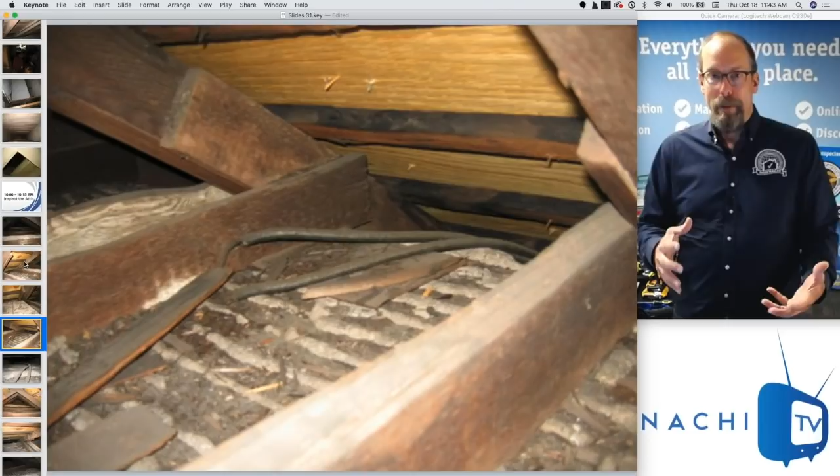Knob and tube wiring is really old, antiquated wiring, and I flag knob and tube wiring as a material defect. Then I need an electrician to come in and take a look at this and let them say hazardous or not hazardous, or potential, or whatever. For me, this is a hazardous wiring method, an ungrounded antiquated method of wiring that has inherent flaws and hazardous conditions. If you insulate around knob and tube wiring, guess what happens? It heats up and catches on fire. Structure looks okay, missing insulation. There's no insulation in the walls or ceiling of this house.

That is a lot of energy being lost. I'm glad I can tell my client what's going on. Coming out of the attic, now I'm doing the interior. Interior is maybe 10, 15 minutes, tops.

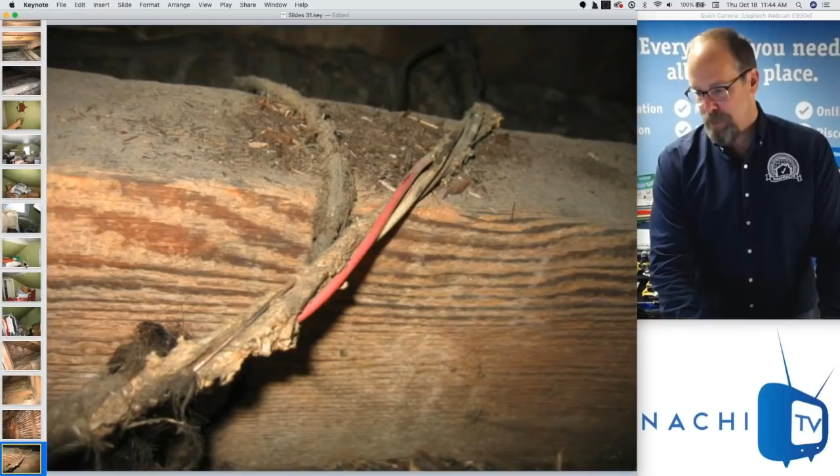Interesting. Knob and tube wiring, wood lath. Ooh, someone was chewing on this. This is old NMB cloth sheath, but it's been chewed up. So that's an electrical hazard. Someone needs to get into that.

Knob and tube wiring, no insulation, cracks, water stains around it—whenever I see a water stain, you can get your water meter out, but let's say you don't have one, no big deal. Indications of prior roof leaks—have your client ask the seller to explain about roof leaks.

If it's not wet, if it is wet, it doesn't matter—you've identified it and flagged it as needing further evaluation. Any kind of watermark could be an indication of something active or something in the past. If it's in the past, great, let the seller explain that.

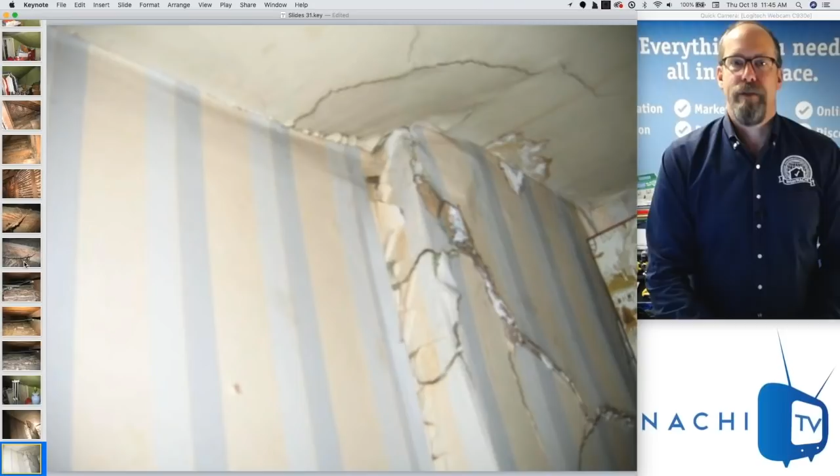If it's active, it doesn't have to be wet for it to be active. It could be a dry day, right? But you see watermarks and indications of something wrong. Okay, a lot of watermarks, a lot of watermarks.

Interior—take pictures of every room, ceiling, floors, ungrounded receptacles, deteriorated paint, lead content, cracks in the plaster, watermarks.

Toilet—flush it, try to move it with the side of your leg to see if it wobbles, check for a bad wax seal. If it leaks on the floor, that's not your problem—it's okay to do that within the scope of your inspection. The sink should not be detached from the wall.

Hot and cold water, plumbing trap is okay, GFCI receptacles, tub—run the water, hot and cold. I actually like to push on the tiles of the tub. If they're soft, if my hand goes through, which it has in the past, it's not my fault—I'm not causing the damage, I'm just observing it.

There's a window inside the shower. The window ledge with loose tile, that's a problem. And the glazing is an issue for me.

I'm not an expert on identifying window and glass block, and I don't care—I'm not a code inspector, but I know you can't have a window in a shower unless it's up high. Code standard construction methods say from the floor surface to a certain height, you shouldn't have any window unless it's a safety area, because this is a hazardous location. So you have to have safety glass or glass block. Whenever I see a window low, close to the shower floor, I get a little nervous.

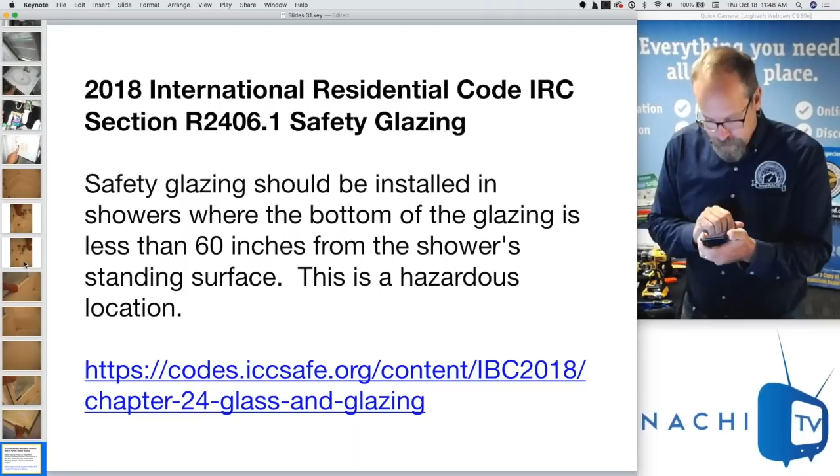As a home inspector, you don't have to know all this. If you're using mobile software, just put it in your notes so that while you're inspecting you can refer to something. You don't have to push the red button on InterNACHI's forum and talk to inspectors live—you can have information and resources to help you. That's another benefit to using mobile software.

Crack glass, vent, windows, smoke detectors—any smoke detector that's yellow in color should be replaced. And here's a GFCI tester. Oh, I don't have that one either. So I'm missing my 6-in-1 screwdriver and the GFCI tester.

You need a GFCI tester. Someone asked about essential tools—you need a GFCI tester. You stick it in a wall outlet and confirm that the 3-prong receptacle is actually missing a ground.

There's the handrail, guardrail, interior, 2-prong receptacles, interior, back door receptacles—some of them are dead, radiators, there's a bulge in the wall, not sure why. Looking around, more smoke detectors.

Laundry—remember there was a sink they brought up in the basement? Laundry is next to the kitchen. Remember that, it was down in the basement? Well, here it is.

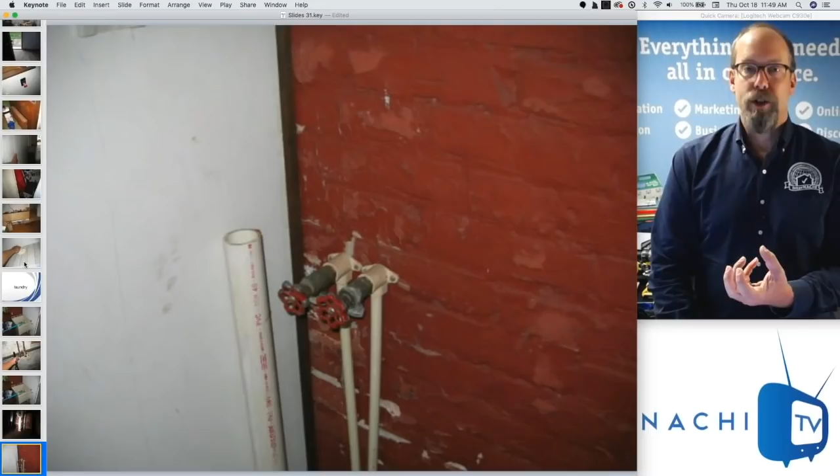Run hot and cold water at the sink. There's a clothes washer hookup, hot and cold water, drain pipe—it's against code, standard building practices. The standpipe is whacked; there's a certain standard by which you have a standpipe. Dryer vent should be exhausting outside—this one isn't, and it's not even there.

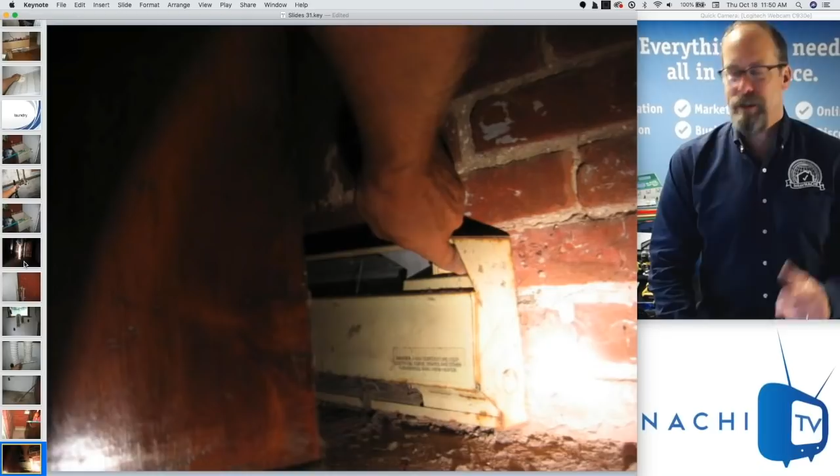Electric baseboard just provides some additional heat. The original heating system didn't get to this room. There are rooms without a heat source, like the 3rd floor, but I turned it on and it smelled really bad because it was burning dust on the fins. The interior ceiling of this back porch, turned into a laundry room area, is okay.

Inspect the kitchen. Old kitchen, run hot and cold water. That's a mess, those are weak pipes. I didn't crush them, I took a picture of them. They need to be replaced.

Missing ground fault receptacles. Even though there are GFCIs there, they're not functioning. Old range, old oven, electric oven - the top oven didn't turn on because it's filled.

So I don't turn anything on like this. If you do, make sure you hold onto the handle and turn it off. Don't leave that oven, don't leave that range on. That was one of our rules for inspectors - if you're going to test the oven, you have to hold onto the handle and don't let go. You don't want to turn on the oven and leave for the rest of the day, and then someone comes home in the evening and there's problems.

So it's an older home. My client knows what they're getting - a bit of a fixer-upper. I do the report summary at the last 15 minutes, and at 11 o'clock I'm basically done. I'm ready to go. Report summary with the client and get paid.

The entire report can be available right now as a link to the cloud. And here's the report, here's a report summary: unlined chimney, missing handrail, exterior water faucets - no, there are no water faucets on the house. Missing GFCIs. There's a large hole in the cast iron drain pipe.

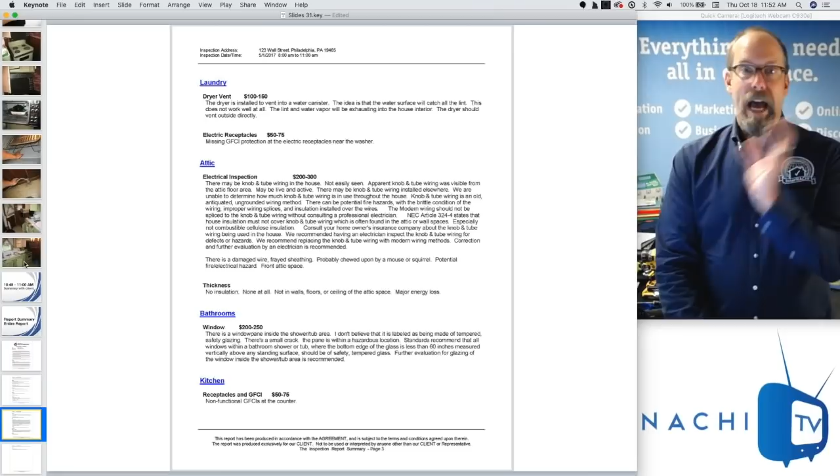Exposed dirt on the floor of the crawl space, remember that. The dryer vent needs to go outside. Missing GFCI receptacles in the laundry. In the attic there's knob and tube wiring, and there's some damaged wire, frayed sheathing - something's been chewing on it. And there's no insulation at all, no visible insulation anywhere in the whole house. Oh, and there's a hazardous window area in the bathroom, and receptacles are non-functional in the kitchen, and smoke detectors need to be replaced. That's the summary.

I print that out because they want something. My real estate agent - I asked her, what do you value in a home inspection? She said, well, if you can give me the summary, print it out, 2 copies, that'd be great. One I'm going to work on, the other copy I'm going to give my client. We're going to go back and forth. The one I work on and circle, I'm going to hand over to the listing agent, and we're going to negotiate on it. They're going to fix it before we move in, or we're going to get some money, or we're going to negotiate on that. So I can do that.

I brought a little printer in, sewed a little handle to it, plugged it in, getting ready, my laptop, boom - I can print out from my laptop. Because my mobile device I'm inspecting on is actually syncing. On my computer I log into my software website portal, and I can print anything I want and edit anything I want, and it syncs. I can print out the entire report, I can print out the summary. I don't have to do anything.

It's all available online through a link because I capture my client's email and my client's agent's email. Now when I'm at this point, doing all this fancy stuff with my software and reporting and binder, and I put the summary in here and all, hopefully a lot of agents are there - the listing agent is there - and they're being impressed by the incredible value that I provide to my clients. And I call them clients, they're not my customers. I have a client base. If any one of my clients calls me, even if it's during an inspection, especially if it's during an inspection, I answer the phone.

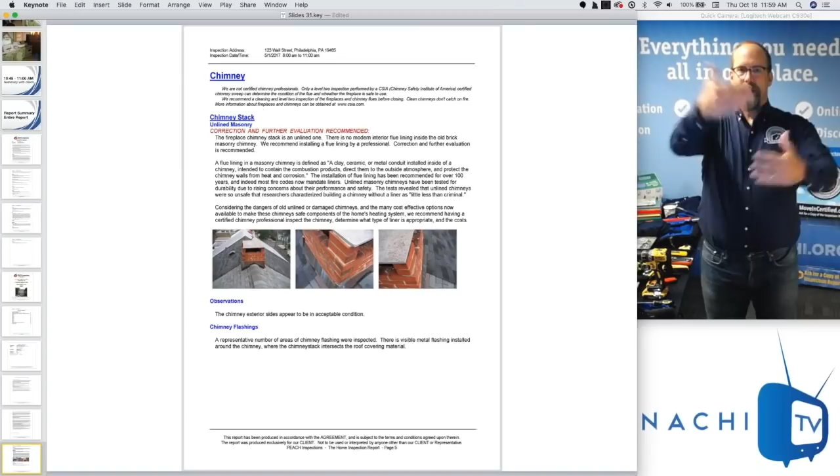So what do you want to make an hour? You go the other way—you can reverse design. I want to make $100 an hour. Well, you got to charge at least $100 for that hour. How long does it take you to get there and back? An hour total driving, an hour and a half total, I don't know, on average. So you want to make $150 to $200 to do a roof inspection, right? That's going to take you one hour.

What else is involved? Well, you need a ladder. You already got one? Okay, so you don't need to invest that—you already invested that. Overhead, tools. You need certifications? Well, you need an InterNACHI membership, right? Stretch that out. You have to think, what factors are involved for you to make $100 an hour, and what's your profit on it? For $100 an hour, doing a roof inspection only, a partial inspection, there's probably a lot of profit.

If I can do it in less than an hour, that's really good. It's difficult to calculate profitable inspection fees without using math. If you're just looking around at what your competitors are doing, you're probably going to underprice yourself, because a lot of inspectors don't know what they're doing, and so they're driving the price down.

And to stop that, two things. One, communicate that we all got to be going up, right? Not driving down—that's no good for anybody. And learn how to provide incredible value and relationship with your client base and real estate professionals, and join other networks, other professional networks.

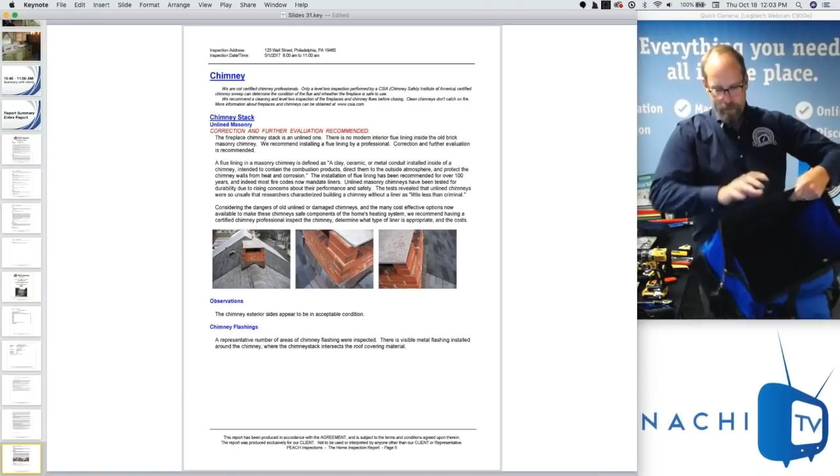All of this—I would have interior shoes only, and I carry them in my tool bag. This is a fantastic tool bag. They still make this. This is exactly my tool bag that I've used all my life as a home inspector. Large mouth, open tool bag with lots of pockets for all my extra tools, and plenty of room—I can attach it like that, right? I can put even a drill to get into attic spaces if I need to, take off a drywall screw. I can put stuff in there, and my shoes go in there as well. I just shoulder strap it, and I bring it.

That's the first thing I do. I bring everything to the front door. I get out of my truck—I'm early, remember? Earlier in the class, I talked about arriving early. Put all my tools next to the front door, my step ladder to the attic. All my gear is there, tools, and then I go grab my ladder off the ladder rack on my van, and I do the roof inspection. When you do a roof inspection, you can put this on the ladder rung when you're done. And if you're going into a crawl space, put this next to the crawl space opening, especially if the crawl space access is in the floor—you don't want someone looking up and falling through the floor. I don't know how I got on that subject.

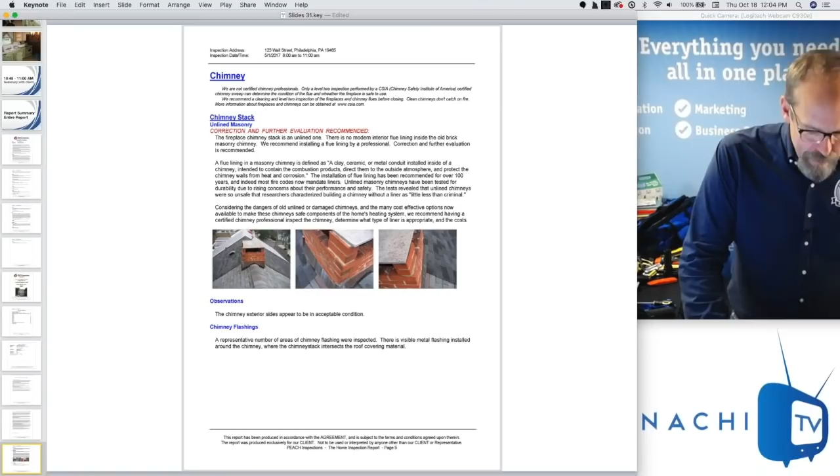Should we go against SOP by walking on the roof? Should you go against the standards of practice by walking on the roof?

If you walk on it, that's called exceeding the standards of practice, not going against it. Standards of practice is the absolute minimum required to perform whatever you're doing. So the home inspection standards of practice is the absolute minimum things you're required to do to perform a home inspection. Absolute minimum.

I tend to exceed the standards of practice in a consistent manner for all my clients. I use tools not required, I walk upon the roof, not required. I open things, I move insulation, not required, and I exceed the standards of practice in a uniform, consistent manner for all my clients.

So all my clients can expect me to try to get up on the roof. All my clients can expect me to use a flashlight, an infrared camera, and a moisture meter. All my clients can expect me to try to use a tool that can go up in the attic or unfinished spaces and measure the insulation, move it around, and stuff.

So I exceed the standards of practice, not required to. If you want to play it safe, absolutely abide by the standards of practice, not just substantially but totally if you wanted to. We have an article written by our legal department about exceeding the standards of practice and that it's okay if you do so. You just need to do it consistently for all your clients.

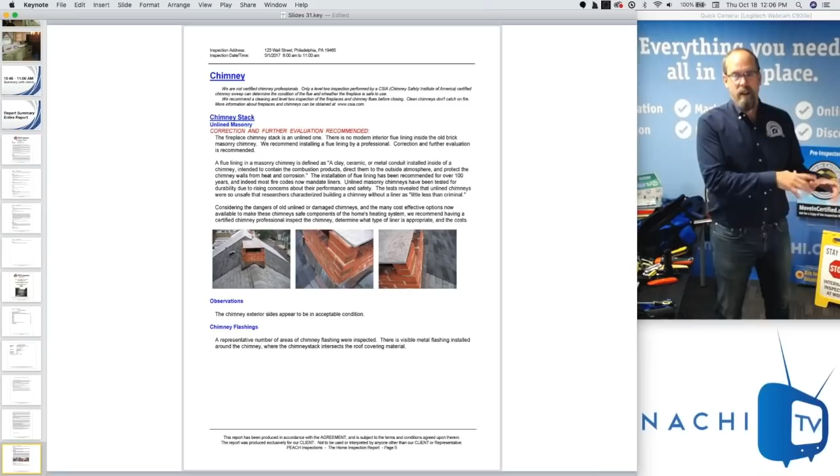There's a cosmetic defect, which means agent, you don't even have to think about this. This is just a stain on the carpet, but my client probably wants it in the report. We all know cosmetic defects are blemishes, flaws, really irrelevant. Has nothing to do with the real estate transaction at all.

This is a beautiful dream home. It's going to close, but I'm going to put this blemish in the report just so it's in the report. It's not part of the negotiating. It won't be in the summary. It's not going to be highlighted.

Minor defects - these are things that should be fixed, but the homeowner can do it, your client can do it, after they move into their dream home. Change the thermostat to programmable, change the air filter, replace the clothes washer hose, clean the gutters. Major defect, you may want to negotiate over this.

So agent, I'm going to highlight major defects in my report, and they're going to be headlined with a header: major defect. I define what a major defect is. That means it's a problem that I observe, I deem it to be a major defect, and we need a contractor in here. We can talk about that in the summary. It'll be in the summary. It's one of those things we negotiate over.

There's another defect where this is going to hurt someone. It's called a material defect. It's so important, it's defined in the standards of practice. It's something that poses an unreasonable risk to someone's health, someone's life, or has an adverse impact on the value of the home. So a material defect, as an example, would be...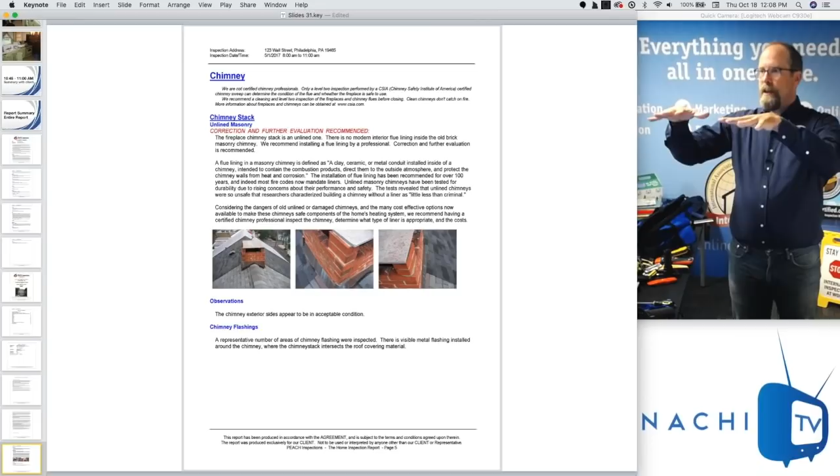A deck that isn't secured, isn't self-standing, isn't securely attached to the house structure, and there's missing flashing, and there's evidence of wood rot behind the ledger board. So now the fasteners are actually not attached to the house at all. And the deck collapse is imminent. That's a material defect.

This poses an unreasonable risk. I know this because I've deemed many decks as a material defect because of those situations. Several, right? And we have to tell the seller and the occupant, I don't want anybody on this deck.

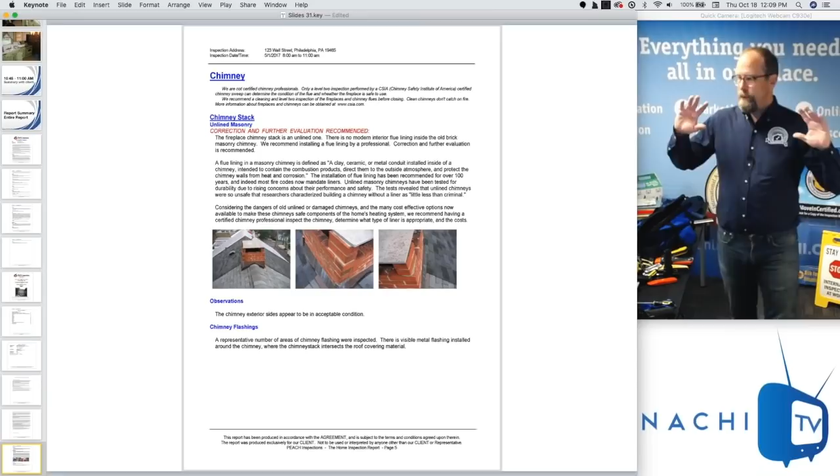That's really bad, that is a material defect. So major defects, material defects - that's what allows me to inspect the heck out of this thing and make a 50, 60, 70 page home inspection report. The summary will only be 1 or 2 pages, and it will only highlight the real serious stuff that you need to fix or negotiate over.

Okay, understand that. Now I have the freedom to do whatever I want. Oh look, there's a stain on the carpet - click in the report, page 10. Oh look, there's a minor problem, there's an air filter - boop, click. Now you can inspect the whole house.

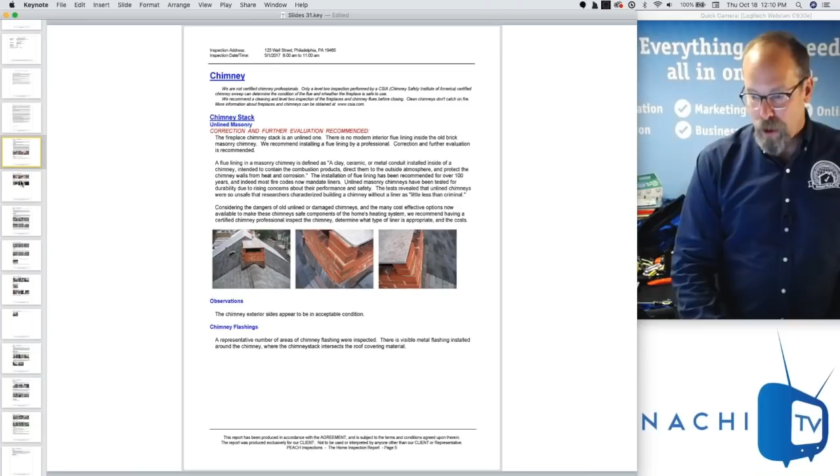There's always a way through the issue that you have, and you can just talk to your mentor or fellow inspector or your inspector coach or someone online on Facebook or on the InterNACHI forum. There's always an answer. There are no secrets to running a successful business in which you just happen to perform inspections.

There's a chimney flue, that's in the report. Love my inspection reports - my inspection reports, everybody loved them. I think it's because of the pictures. Lots of pictures - there's so many pictures that I could possibly put in the report.

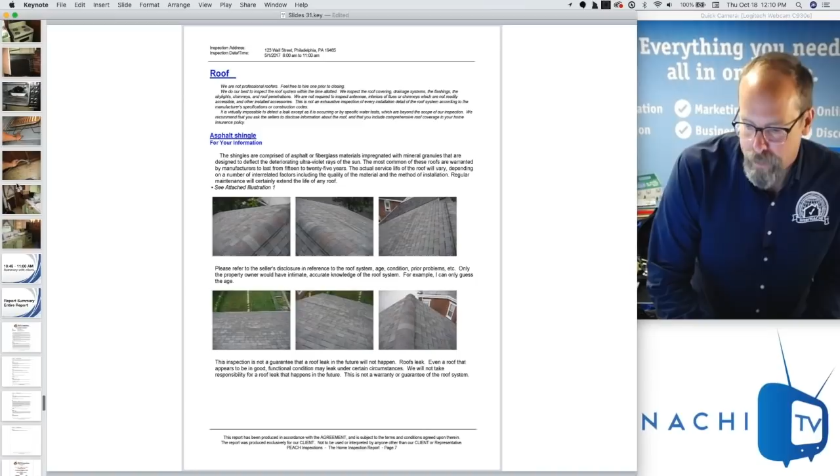I took maybe 300 or 400 pictures altogether. Well, let's see how many pictures - what slide is this, darn it, I don't have a number. Well, let's say it's 300 pictures, maybe 40 are in the report itself, and the other ones are archived and available.

There's a picture of me walking on the roof and touching the shingles. There's the gutters, there's a downspout problem. There's siding coming into close contact with the ground - that's no good, all of these are monitoring recommended. Some hairline cracks, stress cracks or shrinkage cracks, just monitoring is recommended. And some cracks in the sidewalk, improvement can be done. But the missing handrail, that's a correction - that's a major problem.

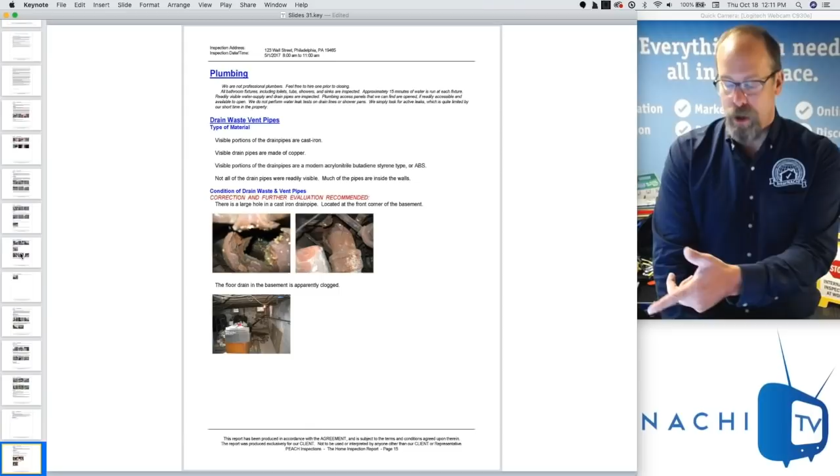There's no air conditioning, by the way. There's the heating pipe - oh no sorry, this is the plumbing. Cast iron has a hole in it. There's a water shutoff valve. There's the boiler, there's no hot water. There's electrical, there's the electrical panel. The wiring seems okay, except for the knob and tube wiring in the attic. There's the boiler - we have a problem with the boiler, but the components there are listed. Kind of neat where I just list the components, right?

So in the report, this is how I wrote it - you don't have to, I'm just sharing what I did. I think of it as a system. From far away I take a picture of the system, then move closer, about halfway, take another picture, looking for irregularities, anomalies, defects. Then I get up close and touch every component, and take a picture of it, and talk about it with my client who's behind me - this is the flashlight, this is the thing.

That's the air filter, and I did clean everything. This is where hot water comes in, but there's no hot water. There's no click, click, click, click, writing the report. After I do the inspection of the system, I may need to step aside and put details in my software. Okay, done with that system, next. And it takes some time to do that.

Take some time, inspect your own home like 10 times - you'll see the difference between inspection 1 and inspection 10. Even on your own home, same home, you'll get better. So practice, practice, practice, inspect, inspect, inspect, and learn how to talk and write and inspect all at the same time. It's just a lot of fun.

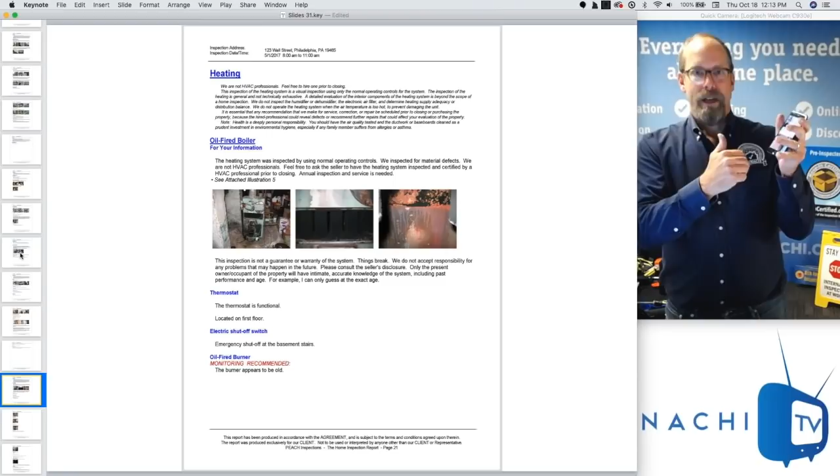Anyways, system and then components. As I have my software, which is essentially my inspection process laid out for me in a checklist form - when I print it, it's like this. When I publish my report, it's system and components. So I have system, heating, description, and then it's a boiler, description of the type of heating, and then thermostat, electric shut-off switch, the burner itself - next page, the circulating pump, the damper flue, the relief valve. This is how I inspected it, and this is how the report is too.

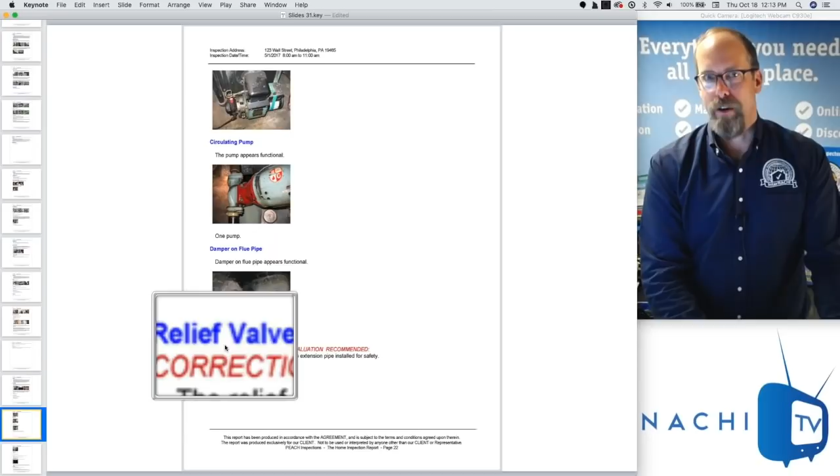I just don't miss anything. Expansion tank, service record, observation, inspection restrictions, estimated age - you don't have to do age. Oil storage tank, that's the system. Components, where there's the oil filter. Next page, it just goes on like that.

System, components, system, components. Half of your work as a home inspector is identifying components correctly. The other half is determining whether it should be in the report or not. Do you have evidence of a defect that you observed during your inspection? If you do, and you deem it to be material, it should be in the report.

Do you use a separate camera or your phone camera? I would use my phone camera. It has camera and video, and you can do selfies. I used to do home inspections with two pouches like this guy, where there was a camera in one pouch and a camera in the other - one for pictures and one for video. Then you'd take out the chips and stick them in your computer. What a mess that was. So this is the way to go.

Mobile software. How much do you charge for a radon test? I assume you pick up the canisters as well. Yep. So it's really up to you - how much do you charge? You actually, with all due respect, shouldn't care what I charge.

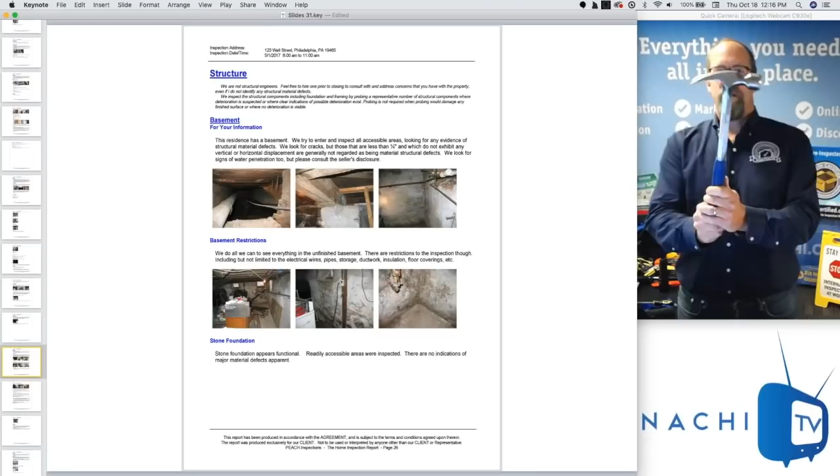How do you do all of this work, figuring out all this stuff in order to run a successful business? Well, I'll tell you, there's a couple things to do. One of them is what my brother recommends - my brother Nick Gromicko, founder of InterNACHI. He says go to one of your hardware stores and buy one of these.

This is how you run a successful home inspection business in the beginning. You buy one of these, and then you walk up to your TV and you smash it. You no longer have a favorite TV show. You do not play a video game. You do not do anything like fantasy football, right? This is the reality you are in.

Business - you're now going to do 30 to 60 minutes every night working on your business. You are not a couch potato. This is exciting, this is fun. If you don't have a home inspection to do, you are working on your business and marketing. You're calling up your inspector coach, inspectorcoach.com, working one-on-one on your next task that you need to do. Remember the soundboard? You're pushing up a lever here or there, just a little bit of work every day.

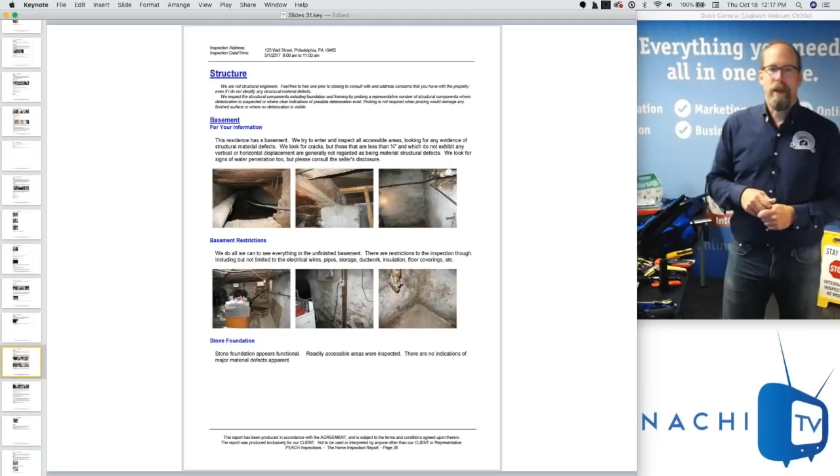If you calculated it out, if you do 60 minutes a night, 5 nights a week, that's 5 hours a week, 52 weeks - is that right? Let's go 20 hours a month times 12 months, that's easier for me. That's 240 hours of work invested at the end of the year if you did 60 minutes, 1 hour a night for 5 nights a week - 5 nights, 5 hours, times 12, 240.

240 hours at the end of the year is what in weeks? 40-hour weeks - that's six 40-hour weeks that you worked on your business and your competitors didn't. You are 6 weeks ahead of everybody else, and you didn't even hire anybody. You just put in the effort, put in the work, right? And that's smart work. So yeah, that's one of the ways you're successful.

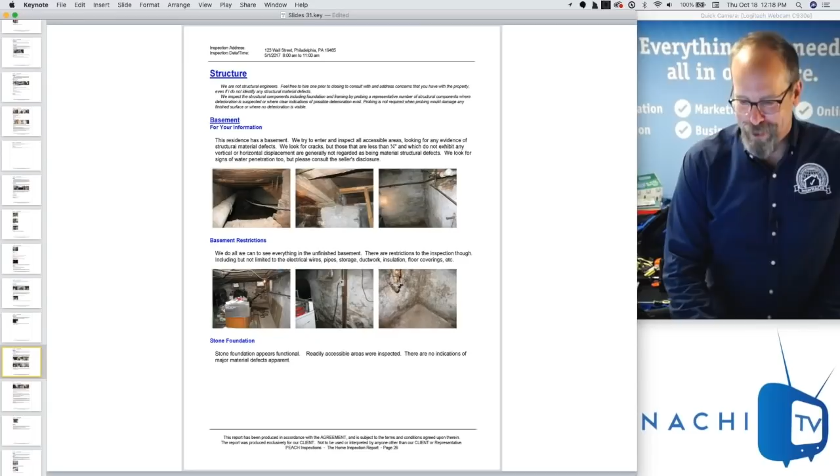So there's no binge watching - I don't even know what that is, binge watching TV shows or something. Yep, so back to my report.

Pictures - the components are identified in blue because it's neutral, but if they were black, it's hard to see. So I liked blue, black text, and red for things that need someone's attention. I didn't try to pull any punches. Red means bad, so I have 'correction and further evaluation recommended,' bold, red, all caps, italicized. And then the paragraph below.

Repair is needed at the floor landing at the basement stairs. There's some inadequate support boards installed here that do not appear safe. So we need somebody to go in there, and that will pop into my summary.

There's a crawl space, a dryer, laundry room. There's the attic, no insulation at all. The house has had roof leaks in the past, indicated by watermarks or stains on the roof decking and components here and there, visible from the attic space. This is commonly found in older homes, no major structural damage, but ask the seller about prior roof leaks.

Monitoring is recommended. I like that. That's called a narrative - that's what you click in your software.

You don't actually write all that, right? I got fat fingers, I can't do that. So what you do is on your computer that's synced up to your mobile device, you type in your narratives. What do you want to say? You have to imagine, if I see watermarks in the ceiling, what am I going to say?

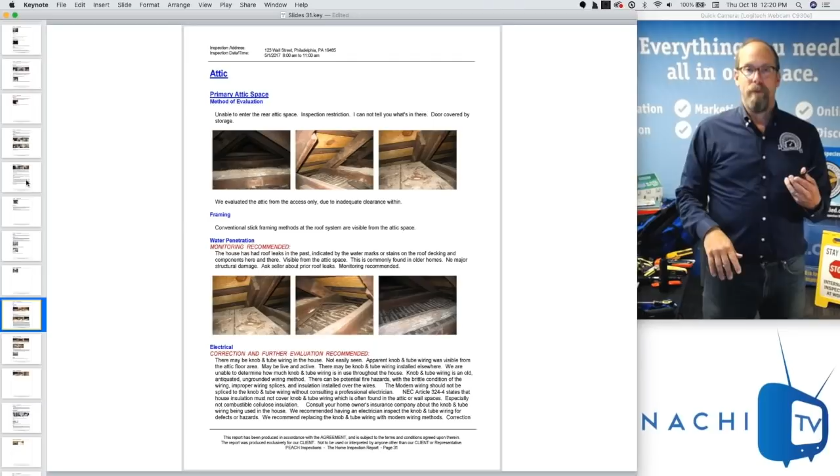Well, here's something you can say. You can actually use these, you can copy paste this. I don't care, copy paste my narratives. My sample reports are available online if you want to download some sample reports. Take them, copy, paste them, use them to your advantage.

Take advantage, that's kind of like what InterNACHI does. We provide a lot of resources, you've got to take advantage of them. And that's what I would click, I would click that paragraph. I want that paragraph in the report right after that picture.

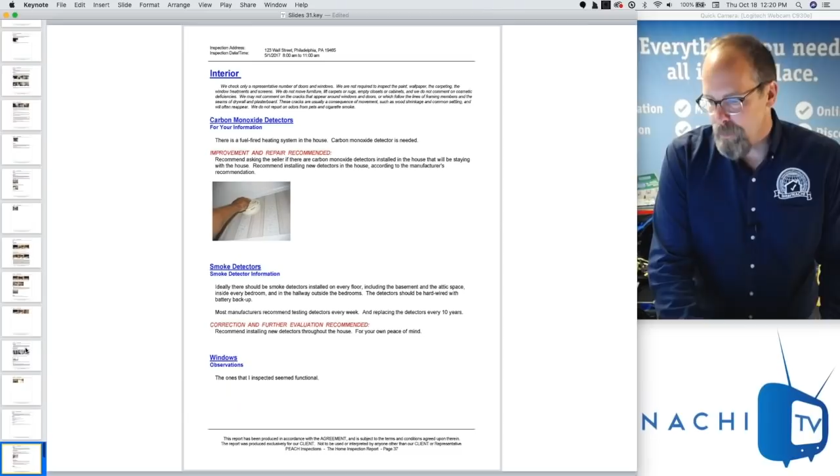Click, software is fantastic. There's pictures of the knob and tube wiring, more pictures there. There's the bathroom, GFCI. There's a window, there's the kitchen, not much in there. Smoke detector, receptacles, there's the handrail. And a little thing about my clients, how I describe that we prefer to have our clients with us for a few reasons.

We can answer all of your questions and address your concerns as they come up. Number two, we can both see the condition of the property at the time of the inspection, because conditions change - immediately after I leave the condition of the home can change dramatically. Number three, I can elaborate on what may be complicated or technical.

So my client wasn't with me. I stuck that in the paragraph, and that helped me later on to describe to the judge that my client decided not to be with me and that I prefer them to be with me for several reasons. One of them would have been very helpful in this situation that we're in right now.

In small claims, if you have all of your legal documents set up - the online agreement system through InterNACHI is free. All your documentation, you have standards of practice, you refer to the standards of practice within the inspection report. You provide additional information to your client, overwhelm them with information that explains certain things they are required to do. It's titled 'Now That You've Had a Home Inspection' for a reason, because the home is now in your client's hands - it's no longer your responsibility.

Now that you've had a home inspection, who's responsible? You are. And here's some information - good luck. Home ownership is wonderful, but it's a responsibility that I'm not going to take as a home inspector. If the roof leaks tomorrow, that has nothing to do with me.